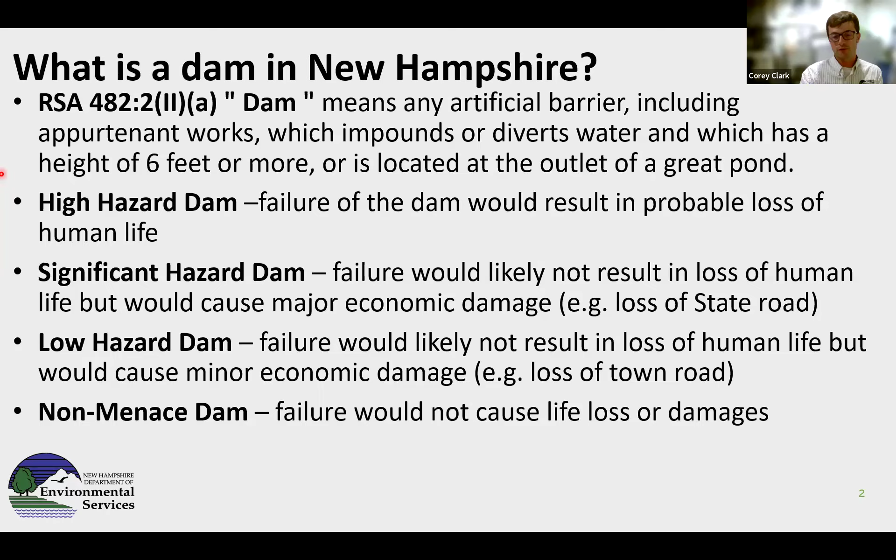And then the bulk of the dams in the state are actually what we call non-menace dams. Those are dams, if they were going to fail, the theory being nobody would really know except for the dam owner. There wouldn't be any loss of life, and certainly there wouldn't be any property damage or other impacts.

So going back to the question that was on the first slide while we were getting the introduction - there are over 5,000 dam records in the state. Those are all the different records from dams that were built previously that are no longer there. There are many sites throughout the state that at one time or another had a dam, typically a wooden timber crib dam in the 1800s. If you go to those sites today, there's nothing remaining of that prior dam being there.

So we have records that actually go back to the 1930s and some records actually prior to that. And so all those records combined lead to the 5,251 dam records.

However, how many are active dams? These are the dams that are over 6 feet in height or located on a great pond or maybe a stormwater detention basin. Roughly 2,596 dams are all located throughout the state, and those are our active sites. So those make up the different hazard classes, which I'll get to in a moment, and also the non-menace dams.

And so those hazardous dams, those are the ones being high, significant, and low. There are 814 hazardous dams. And I'll jump into it a little bit more in a minute, but those are the dams that get inspected on a routine basis. Basically, if those dams fail, there would be impacts, whether it's loss of life or even loss of a town road. So those are dams that we classify as hazardous and are inspected.

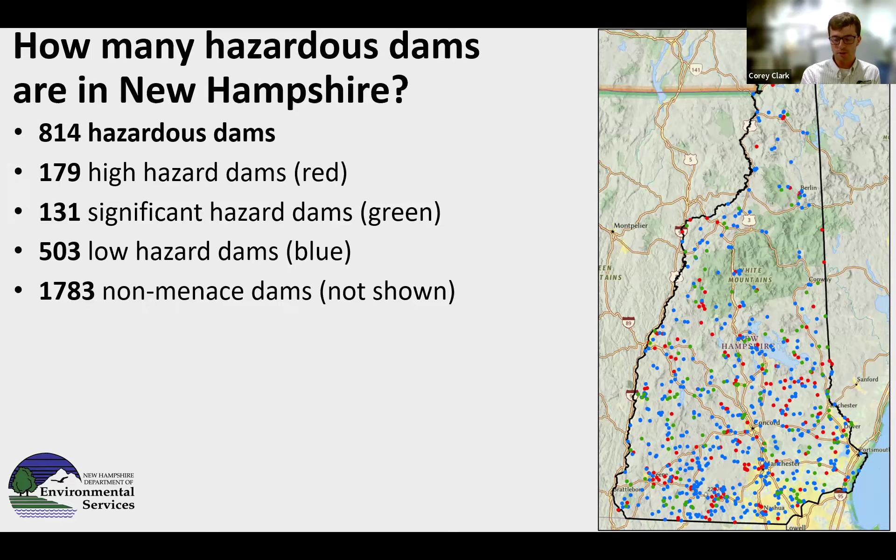Now we dive into what we call the condition of the dams. They're actually broken down, and this is where you can kind of get into, is my dam in good shape or is my dam in bad shape? So out of all the different dams we have in the state, these are the hazardous ones. So those are 814 dams.

251 are satisfactory. They meet all the different loading conditions. They're designed properly and can handle the different storm events that are applied to the dams. Then we have 223 fair dams. Those are dams that might have some concrete deterioration, but really they still meet all the loading conditions. They still can pass the design storm event, but there are some issues that may need to be addressed.

And then we have 205 poor condition dams. Those are dams that don't meet a loading criteria. Think of it as a bridge that may have some sort of deficiency in which it's not meeting the actual design load for the bridge. Similar for a dam. So that's 205 dams that either don't meet stability criteria during a flooding event or can't pass the required discharge during a flooding event.

So going back to high hazard dams, for example, those dams have to pass the 1,000-year storm event with 1 foot of freeboard. Significant hazard dams have to pass the 100-year event, and low hazard dams have to pass the 50-year event. So if those dams cannot pass that volume of water through a spillway or other means, then that's where they get shifted into the poor criteria.

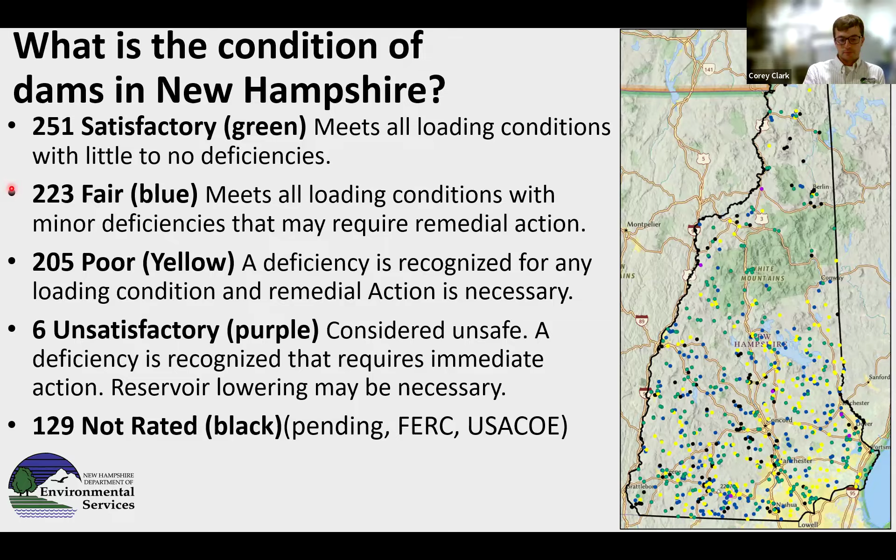So I apologize that things got moved around a little bit in this slide, but the purpose of the dam. We have most of the dams in the state, roughly over 40% are for recreational purposes. Another 27% are for conservation. And then we kind of dive into the other different uses. So we have mill uses, hydro makes up about 2%. And most hydros in the state are regulated by FERC, so actually regulated by the feds.

There are some other hydros that are non-FERC regulated because they're grandfathered in. They were generating power prior to the passage of the FERC criteria in the 1920s. And then we have water supply and a couple other means. But really, most of the dams in the state are actually there for recreational purposes.

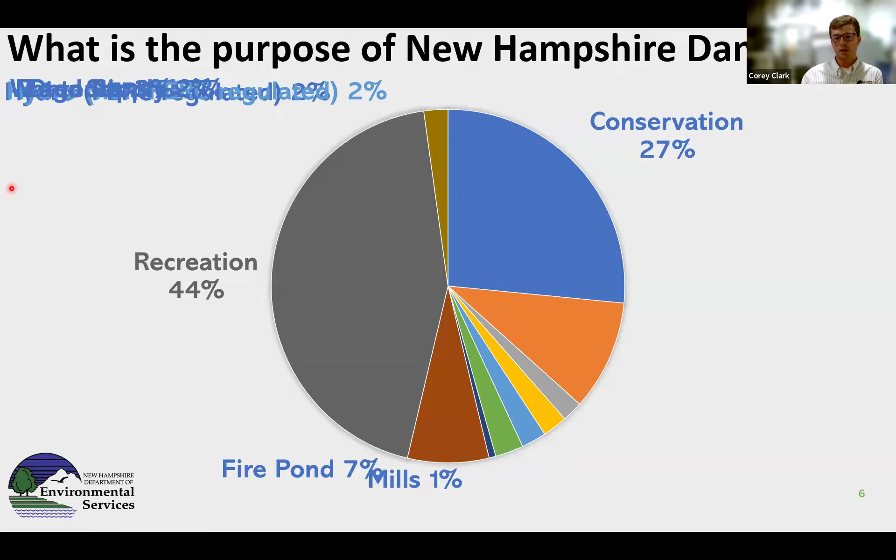So who are actually the owners of the dams in the state? Now, the state of New Hampshire owns a lot of dams. You're going to hear about that in a minute here. But really, the bulk of the dams in the state are privately owned. And that really is because the bulk of the dams that we see are those non-menace dams. And most non-menace dams are owned privately.

So there might be a farm pond dam that was built, say, in the 1960s. It could also be a dam where they built a driveway and they wanted to have some kind of pond alongside their driveway. Still meets the criteria of a dam. Once again, it's a non-hazard, non-menace dam.

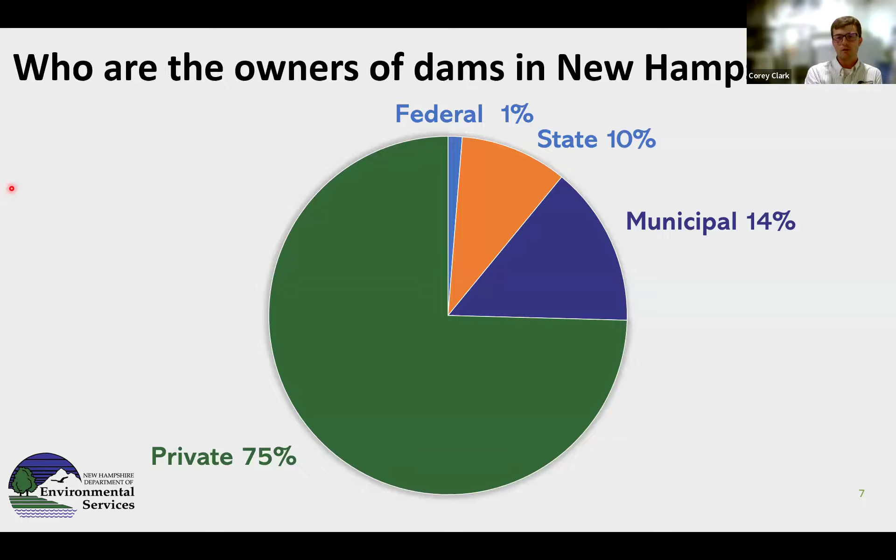But then we break down into municipal owned dams, state owned dams, and then federally owned dams. Those federally owned dams, those are typically the big flood control sites that everybody's familiar with. The Hopkinton Everett Dam over in Henniker and Weare. Then we have the Franklin Falls Dam up on the Pemi. And then we have the Blackwater Dam, the Edward MacDowell Dam, and a few others scattered throughout. But the federally owned dams, those are typically the big Army Corps of Engineers flood control facilities.

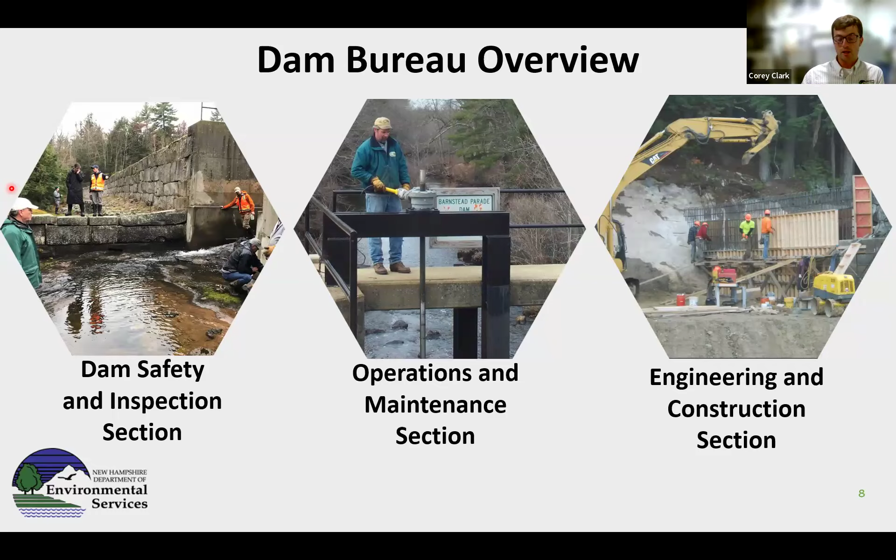So the Dam Bureau is actually broken down into 3 sections that I oversee. I'll go through each section, but all those sections together really create the Dam Bureau. And so as you're out paddling on these bodies of water, enjoying these bodies of water, you may see one or more different individuals from the Dam Bureau, particularly trying to either do operations at a site on a lake, or doing inspections, or even reconstruction.

So the dam safety and inspection section. These are the men and women that are responsible for all those active dams. So roughly the 2,600 dams all throughout the state. Those are the 814 hazardous ones, along with all those other non-menace ones. So they do routine inspections on the hazardous ones. High hazards get inspected every 2 years. Significant hazards get inspected every 4 years. And low hazards get inspected every 6 years.

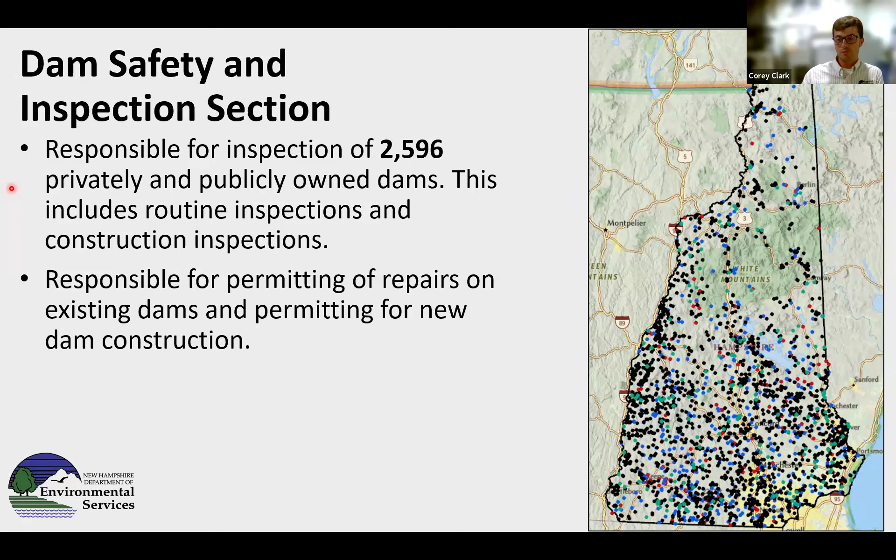All the non-menace dams typically don't have routine inspections. However, they are still in our database, still part of that active structure. So if there's ever a time in which one of those dams get reconstructed, or if an issue comes up at one of those dams, our dam safety personnel can respond accordingly.

So we work with dam owners to ensure their dams are safe, but we also work with the AG's office on enforcement actions. So if there's a dam out there whose owner has gone bankrupt, or there's a delinquent dam owner, we work with the Attorney General's office to make sure those dams aren't creating a hazard or a risk because they're not being maintained properly.

Like I said earlier, we actually work with the Federal Energy Regulatory Commission on overseeing hydropower dams. Hydropower dams are regulated by FERC. However, we have an active role in participating with FERC, because if that federal license to generate hydropower ever goes away, the regulatory oversight for that particular dam now falls on us at the state.

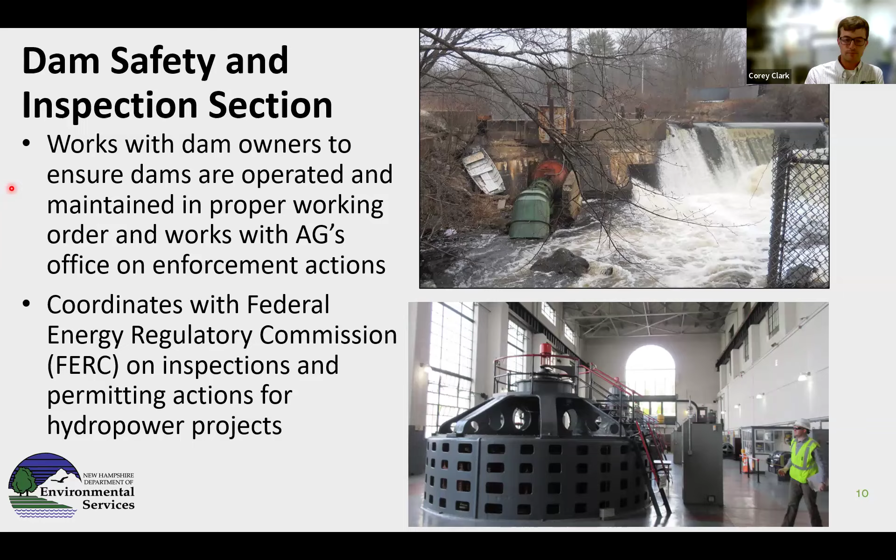Now we move into the operation and maintenance section of the Dam Bureau. These men and women are responsible for operating 202 dams throughout the state, primarily dams owned by NHDES and also New Hampshire Fish and Game. It also includes doing operations at all the big lakes for the most part throughout the state. So we own the dams at the outlet of Lake Winnipesaukee, Winnisquam, Squam, Newfound, Lake Sunapee, Lake Ossipee, and many of the other different lakes all throughout the state.

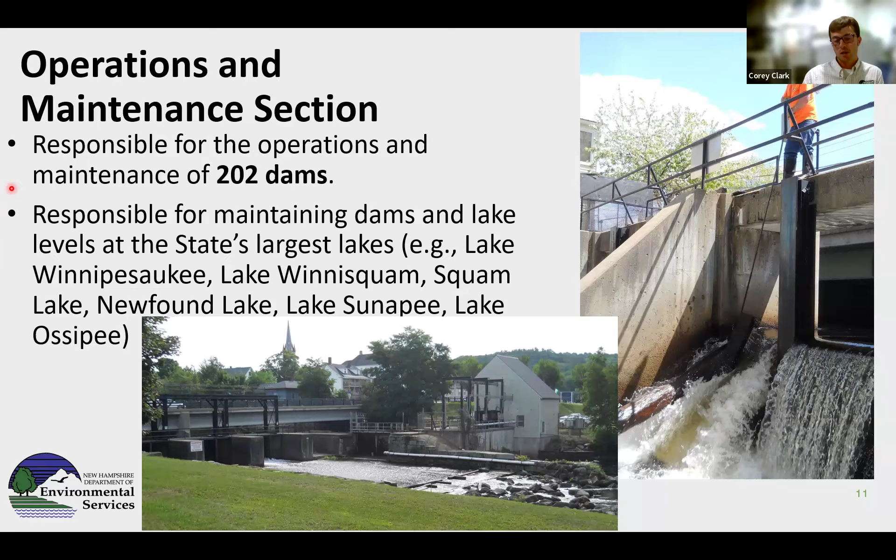With that being said, trying to monitor that inventory of dams and the inventory of lakes and what's going on at those lakes, we actually have a website that anybody can go to and see what's happening on over 30 different water bodies throughout the state.

We also have a cooperative stream gauging agreement with USGS in which we help fund different stream gauges throughout the state. So not only do we have data on a lot of the lakes in the state, particularly the big ones, but we also have data on a fair amount of the different streams and major rivers throughout the state as well. And so anybody can go on and see what's happening there.

As shown in that photo, we also collect precipitation data. We also collect temperature data and some other parameters at some of the sites. That data is then used internally to help with forecasting and figuring out what's going to happen on these different water bodies with different rainfall events or even flooding events coming down the line.

We do have 8 leases with hydropower entities. So we have 8 dams that can generate hydro, and we don't actually operate those ourselves. We actually lease those sites out to private hydropower operators.

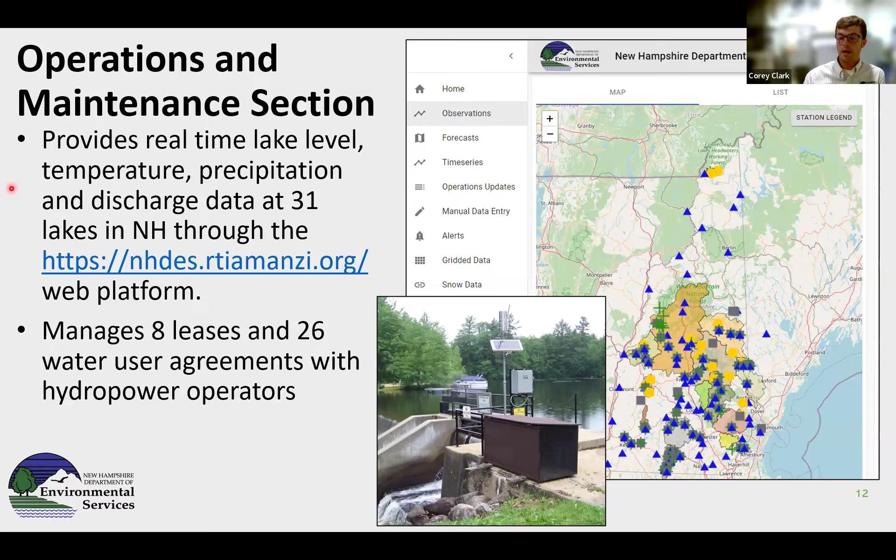We also have water user agreements. You'll hear more about this later in the presentation. But these water user agreements - basically downstream entities, typically hydropower entities, actually pay for the portion of the water being released from different water bodies. So say out of Lake Winnipesaukee, those hydropower entities down on the Winnipesaukee River and down on the Merrimack River pay for the benefit of having that water being released.

Then we move on to the engineering construction section, which is responsible for 270 dams all throughout the state. This also includes dams owned by other agencies: Department of Natural and Cultural Resources, Department of Transportation, UNH, Veterans Home, and a few other agencies as well.

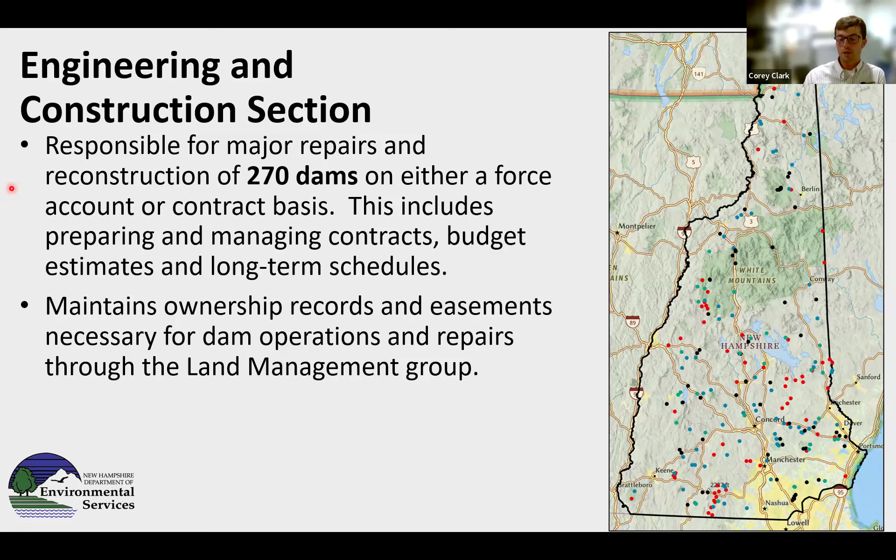That group is responsible for all major repairs, both in-house and out-of-house. We are fortunate that we do have our own in-house construction crew. You can see them in this photo right here. This is the crew working on a high hazard dam owned by Fish and Game, Copps Pond Dam up in Tuftonboro, New Hampshire, that was recently reconstructed.

And with that, we also have to manage all the different emergency action plans that go along with all these significant and high hazard dams. For Copps Pond Dam, you can see this is a typical example of the mapping that goes with an inundation plan that's part of an emergency action plan, in which you can see different portions such as Route 109 and other structures that would be impacted as a result of the failure of that dam.

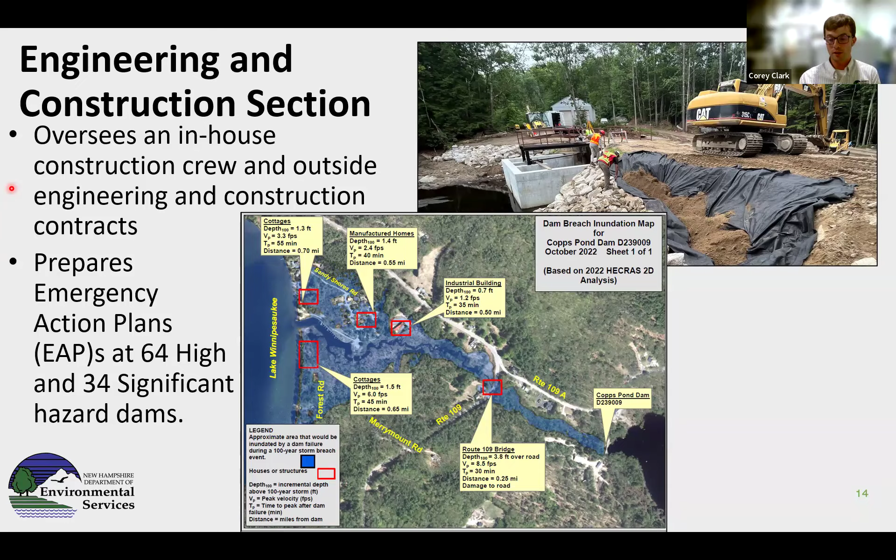So how do we go about funding all this? Well, there are challenges certainly to be said.

The state owns 64 high hazard dams. A recent analysis in 2023 estimated the cost to rehab all 64 high hazard dams would be in the ballpark of about $300 million. The 34 significant hazard dams would be about 54 million. The 80 low hazard dams would be another 54 million. And the 97 non-menace dams would be about 6 million.

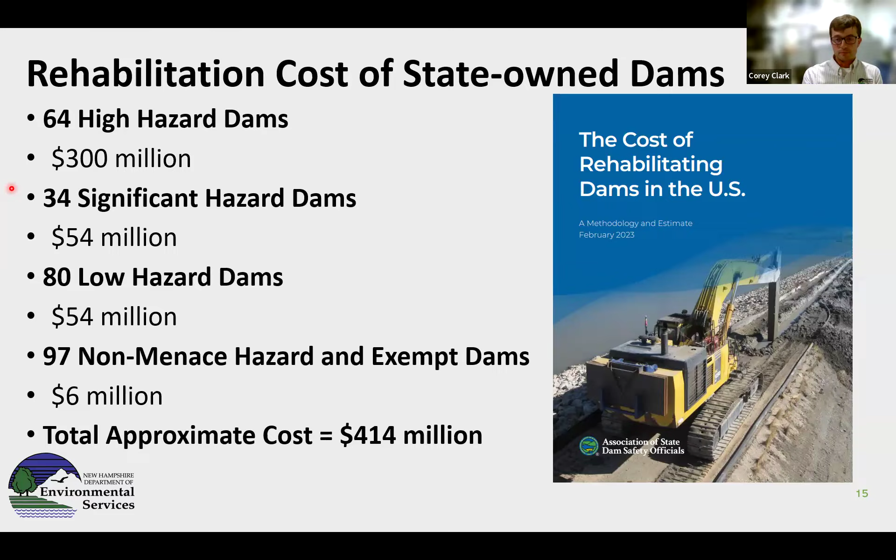So we run currently on a budget of about 7.5 million annually. About 70% of that is state funded through state general funds and capital funds. And then we do what we can to try to allocate additional funding through federal entities, such as through FEMA, through the National Dam Safety Program, that actually helps fund our dam safety inspectors.

And then we're also looking into trying to collect other federal grants through FEMA, such as the High Hazard Potential Dam Grant Program. That's a program in which not only state dams have been rehabilitated, but also privately and municipally owned dams as well. So however, to bring all the dams owned by the state into compliance, we would probably need to double that allocation to roughly about 16 million annually to bring all those different dams up to current standards.

And once again, this is not just a state challenge, but this is also the same challenge that private and municipalities have with trying to fund their dam reconstruction projects.

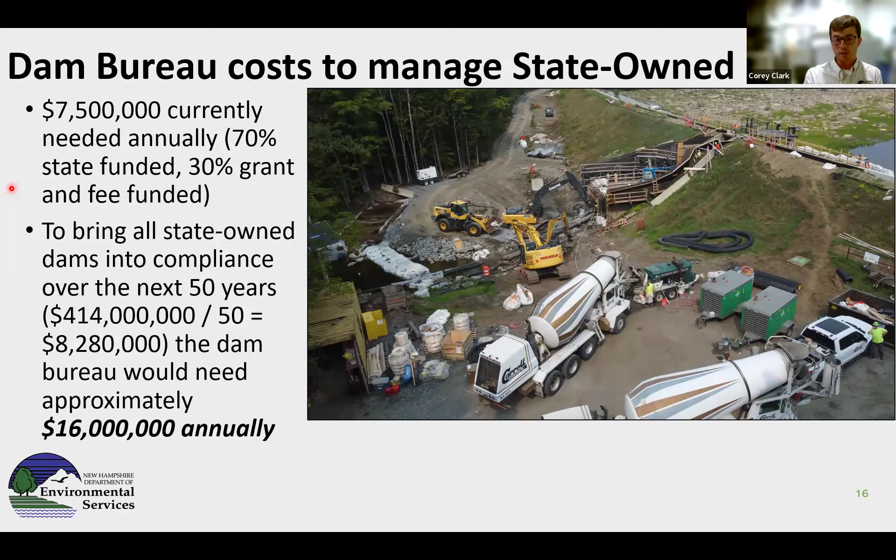So some of the challenges - why are we seeing the cost continuing to go up? The average age of state-owned dams is well over 100 years, and it's really not that much different for dams all throughout the state. A lot of these dams were built for downstream mill purposes by private entities, so they were originally built in either the 1800s or the early 1900s.

These photos here are from Goose Pond Dam - you're going to hear more about that in a minute. But these dams were built for those purposes. However, as the need for water power decreased, the ownership transferred from these private entities to either the state or public entities as well.

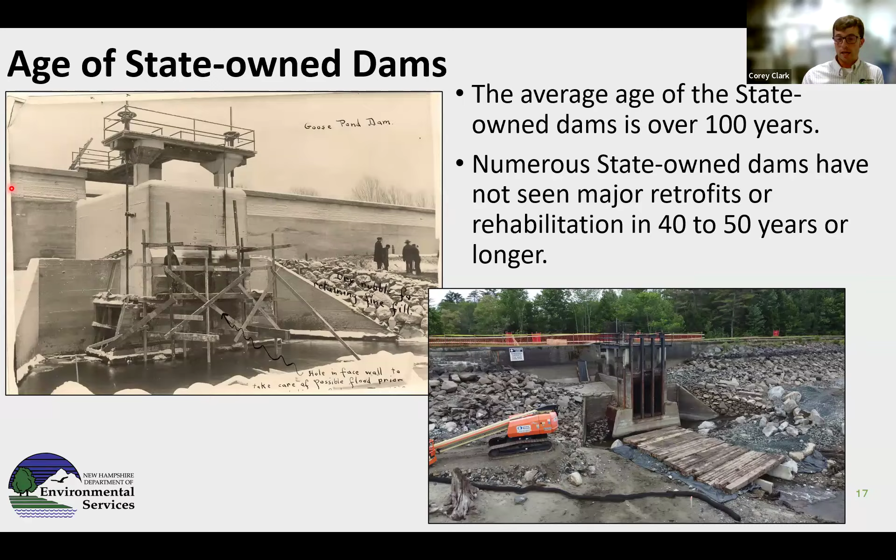The other thing that's happening is there's just a lot more development going on, particularly downstream of dams within different floodplains. This is just one example of the homes located within the FEMA flood map downstream of Ossipee Lake Dam that we own and operate as well.

So one thing I like to point out is the number of high hazard dams, once again not just for state but also private and publicly owned dams, is continuing to go up. And it's not because new high hazard dams are being built, it's just these what were once low hazard dams now have a home or multiple homes built downstream of them. Now that low hazard dam is being reclassified as a high hazard dam because if it failed, it would impact those homes. Therefore, the criteria increases for that particular structure.

So for one example, in 2004 there were roughly 30 state-owned high hazard dams. Now there are 64 high hazard dams.

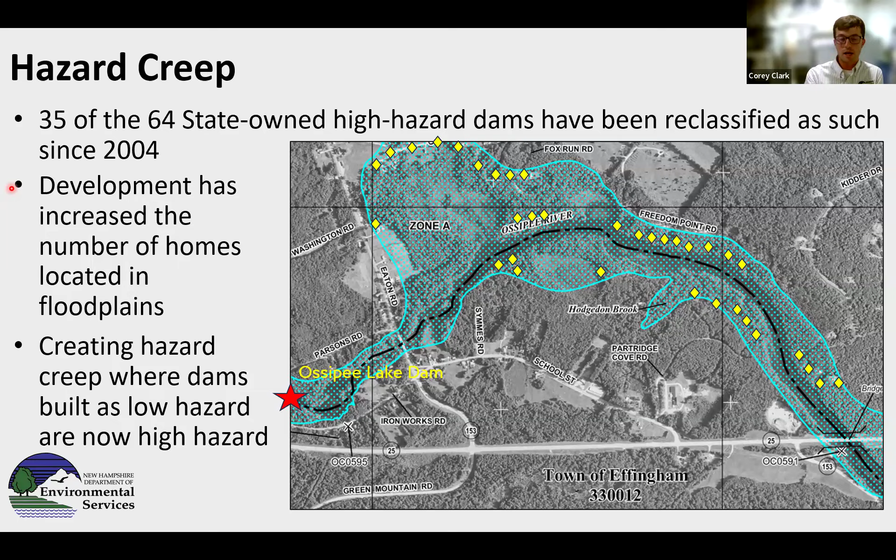The modeling has gotten much, much better. This is computer-aided modeling, not only trying to figure out what's going to happen in a watershed when water is applied to it, but also trying to figure out are these dams stable or not. And so when you're using those new modeling techniques to really break down and analyze structures, we're finding that a lot of the structures aren't meeting the criteria.

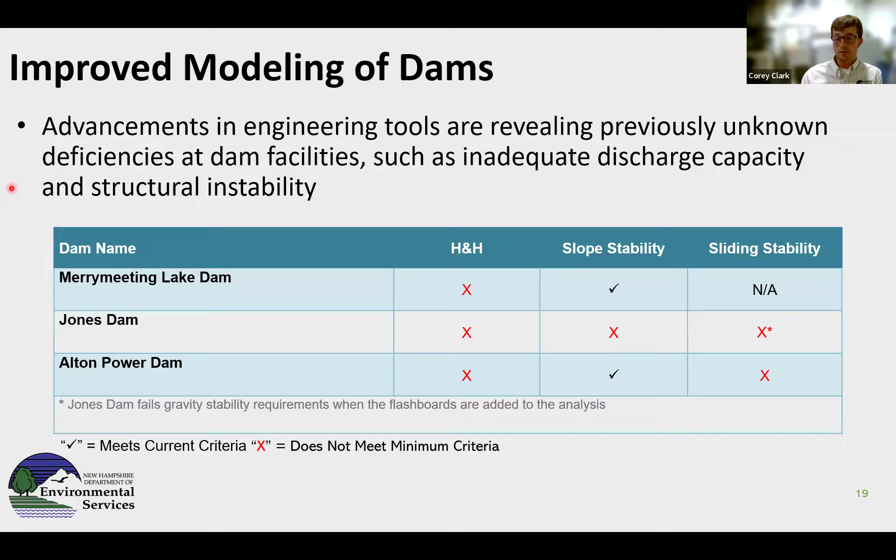One option that we always look into is trying to actually decide, is it in the best interest to keep this dam, or can we remove this dam?

So for example, these are 3 state-owned dams on the Piscataquog River over in Goffstown and Manchester. At one time, they all produced power. Now, the only dam that produces power is Gregg Falls Dam. Hadley Falls Dam hasn't produced since 2007, and Kelley Falls Dam, unfortunately, due to regulatory requirements for hydro, the hydropower leasee actually walked away from that site in 2024. So now we're left just producing power at Gregg.

Knowing that we're going to have to rehab all of these sites eventually, we're actually pursuing removal at Hadley Falls Dam. But it is a challenge - that dam in particular is in the central Main Street area of Goffstown. So there are going to be impacts as a result of that dam removal.

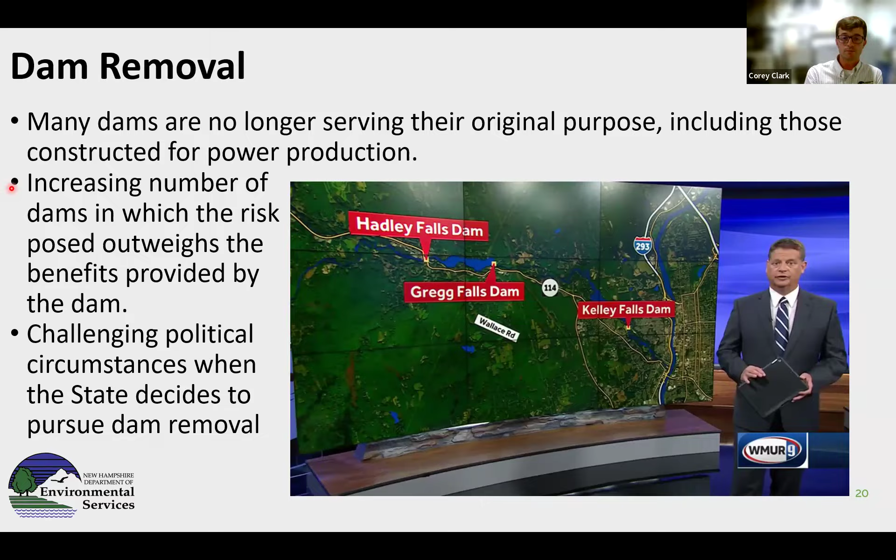So let's jump into Goose Pond Dam to really kind of look at how we make decisions about dams, and how we go about doing these reconstruction projects that some of you may be familiar with, some of you may not.

This is a dam located up in Canaan and Hanover, in the Upper Valley. It's part of the Mascoma River watershed. It's roughly 31 feet tall and a little over 1,200 feet long. The water body and drainage area are relatively small, but the dam itself is actually a pretty good sized dam here in the state of New Hampshire. Once again, a high hazard dam.

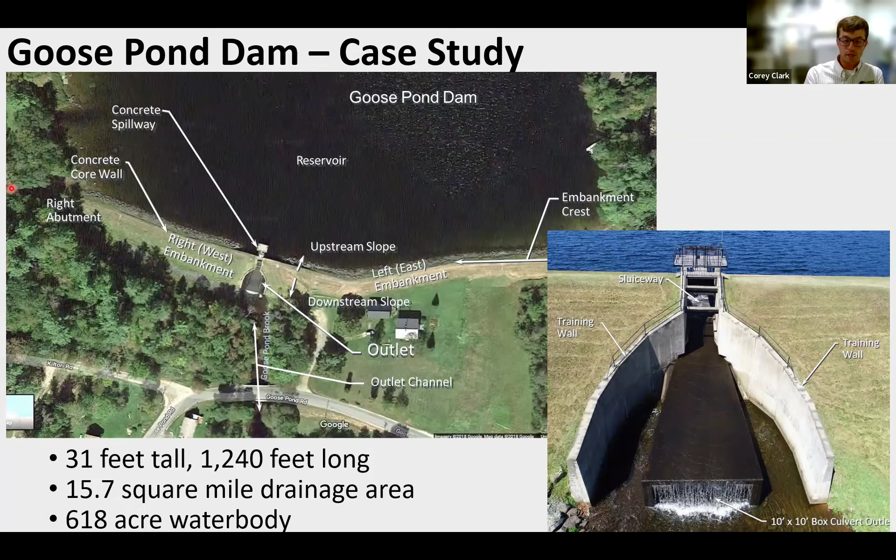It was constructed in 1918 for water storage for downstream mill purposes. It was designed as an earth dam with a concrete core wall, which you can see here on the right of the screen. Interesting thing, there was a former wooden dam here from the late 1800s as well. This dam was much, much bigger, replacing that original dam that was built in the late 1700s or 1800s.

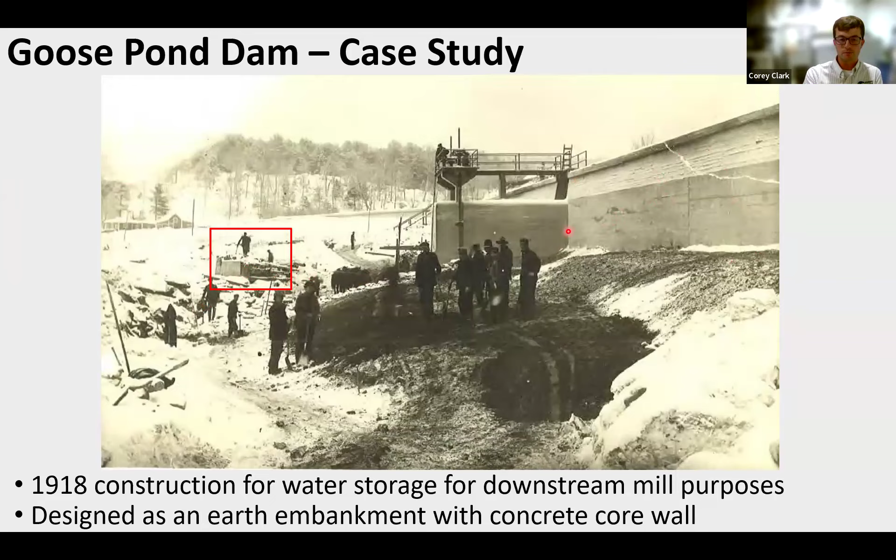One of the things we try to hone in on is figuring out the history of these dams. Fortunately, our records go back to the early 1900s and sometimes into the 1800s. Understanding what's happened at a dam in the past, not only with the construction but what issues have occurred, helps drive rehabilitation decisions moving forward.

One thing I want you to keep in mind is this red barn you see on the right of this photo. This was taken in 1928 when they discovered some seepage, basically water moving through the dam. So they put in a foundation drain along the bottom of the dam to help collect that water moving through it.

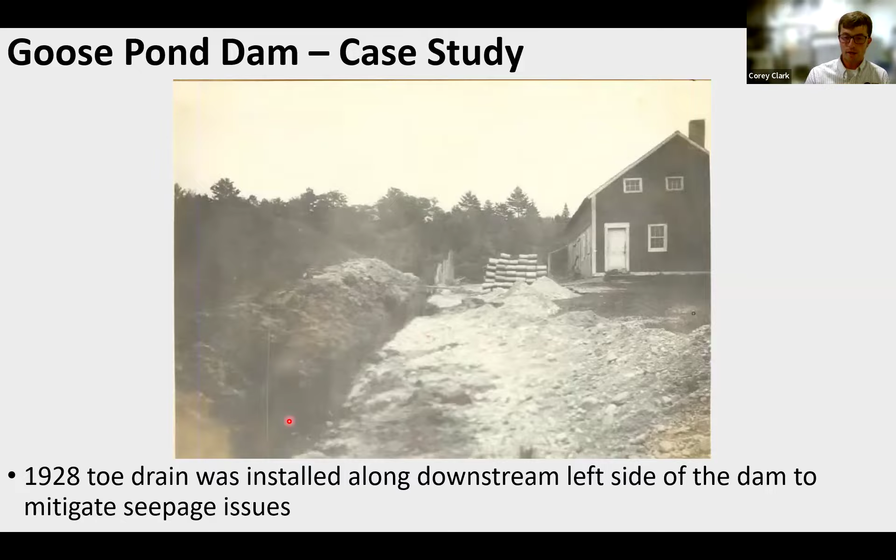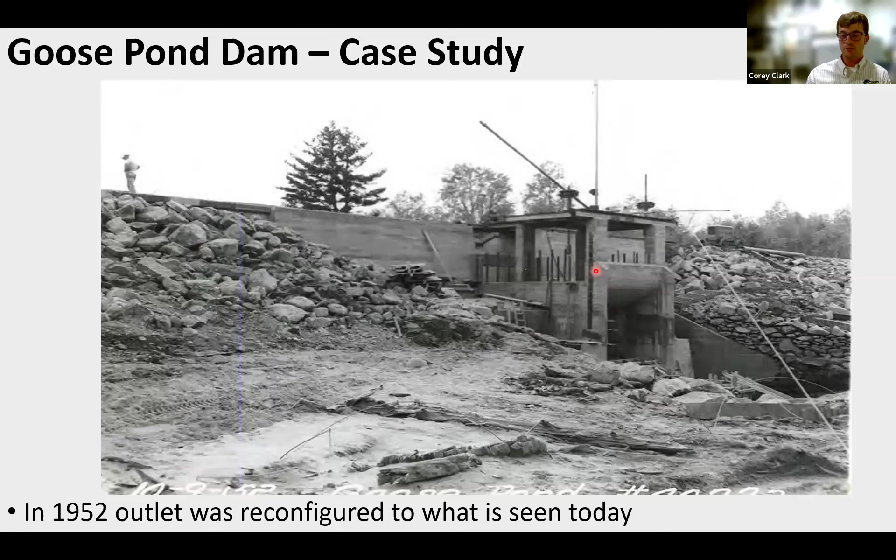In 1952, they did a lot of different modifications to the outlet structure to try to move more flood water through the structure. But really what happened in the 1950s is what we've been rehabilitating over the past several years. Since then, the outlet structure really hasn't changed that much.

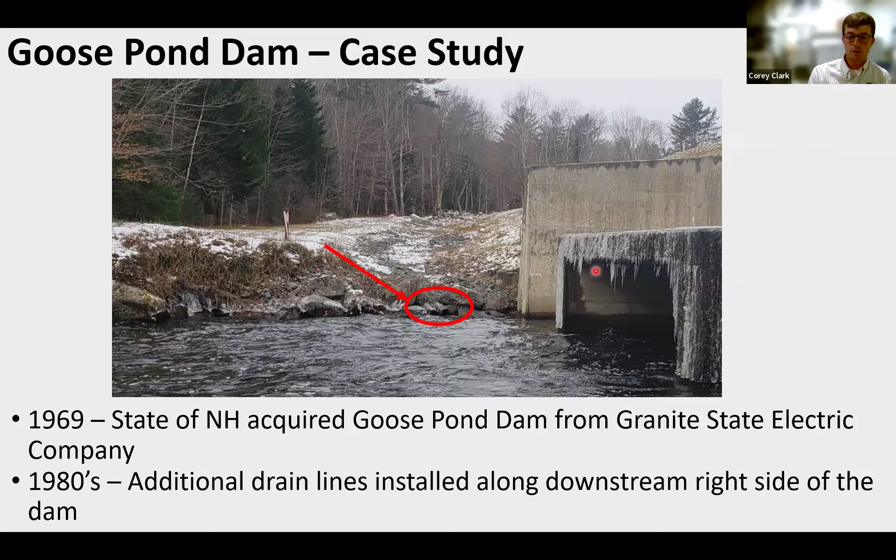The state took over ownership of the dam in the late 1960s. Even though we have 207 dams we're responsible for now, in the early 1900s the state of New Hampshire didn't own any dams. This goes back to power companies no longer needing these structures—Goose Pond Dam was transferred from the Granite State Electric Company to the state in the late 1960s. In the 1980s, more drain lines were installed to relieve seepage.

In the 1990s, our in-house construction crew did some work on the outlet structure, the same structure present since the 1950s. The big thing they did was draw down the impoundment to replace the flood control gates on the upstream side. These are all wooden boards stacked on top of one another. Interestingly, in the rehabilitation these gates are no longer used at this site—you'll see later they actually got moved somewhere else.

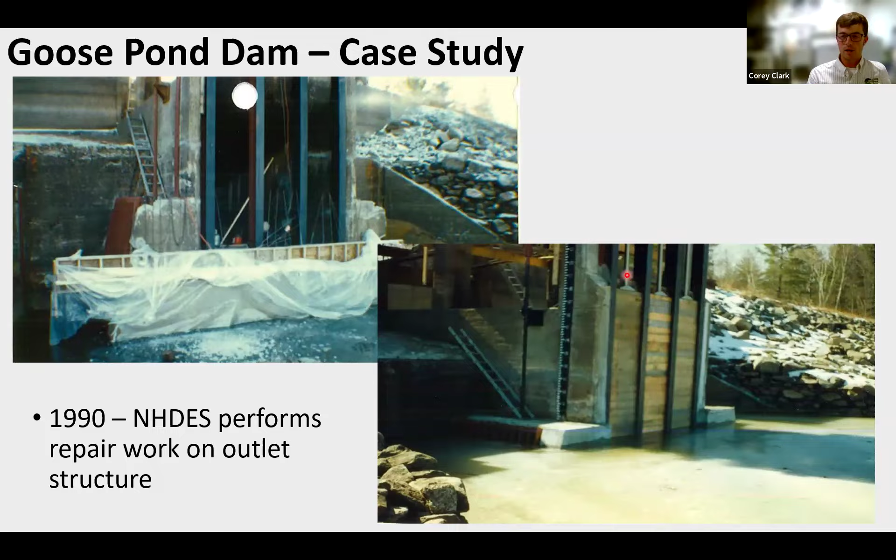In 2012, we were doing repairs to the outlet tunnel—those discharge gates release water into a tunnel. While that work was taking place, we discovered some pretty significant leakage around that concrete structure. We already knew the dam had historically had seepage issues through the earth embankment, but now we were seeing additional issues around the concrete structure.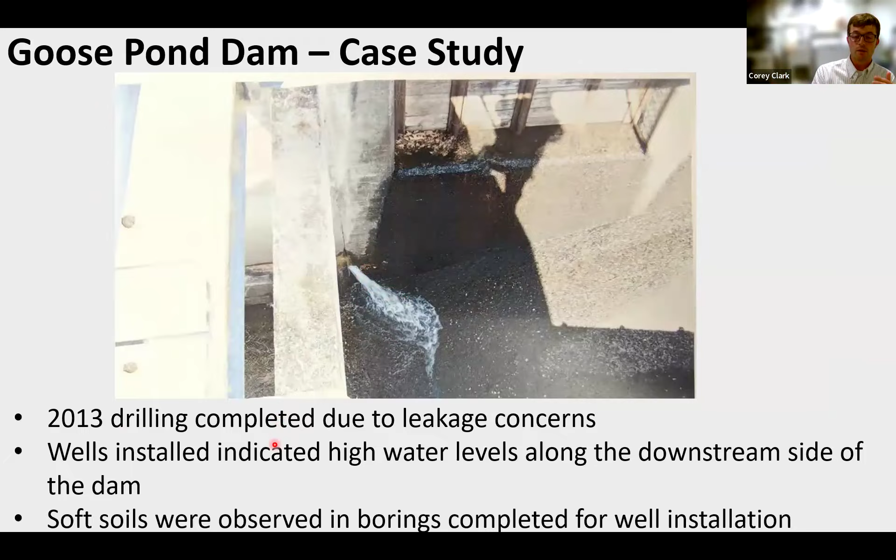So we did some additional borings within the actual embankment and discovered that water levels within it were very high, and that the soils were relatively soft as well. That raised some concern.

So in 2018, we did what's called a potential failure modes analysis. This is where everybody familiar with the dam, along with a consultant, sits in a room over the course of a couple days to dive into what the issues could be with this structure and what we should be most concerned about. What we found was that seepage along the abutments of the outlet works could lead to a failure of the dam, or seepage beneath that concrete core wall could also lead to failure. Those were the two biggest items we really had to focus on.

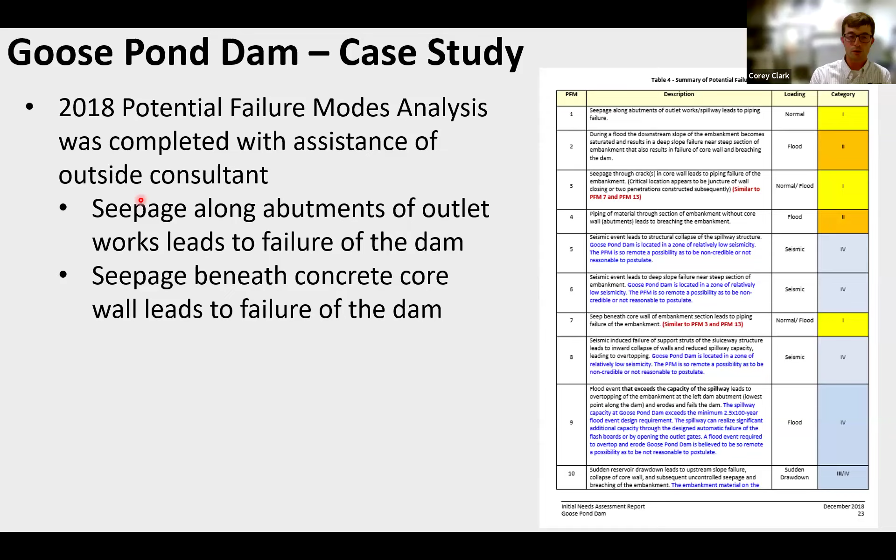So what did we do? We did some more investigation. In 2018, we did a whole other series of borings, really trying to make sure we understood what was in the dam and what we were seeing in those 2013 test boring results. They were actually drilling into the soils to figure out what's there. We also did inspections of those drains from the 1920s and the 1980s and found that a lot of those drains are actually compromised and no longer working efficiently.

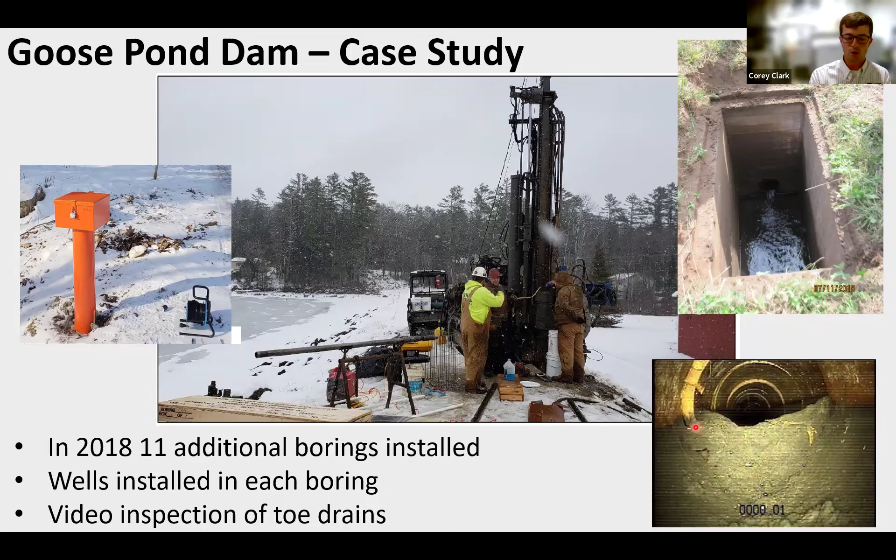So what did we actually see? My apologies here, but I'm going to try to get this video working. One thing that we found... it's actually having some issues playing the media, so I apologize for that.

But what we found was artesian water pressures. In this video, there's actually water dripping out of this case, coming down. So what that means is water is percolating up through the pipe on the inside of this orange box and actually bubbling out through the bottom of the box. We actually had to drill a couple holes to allow the water to escape. The pressures below the dam were such that we were concerned that essentially erosion internally in the dam could actually lead to a failure of the dam.

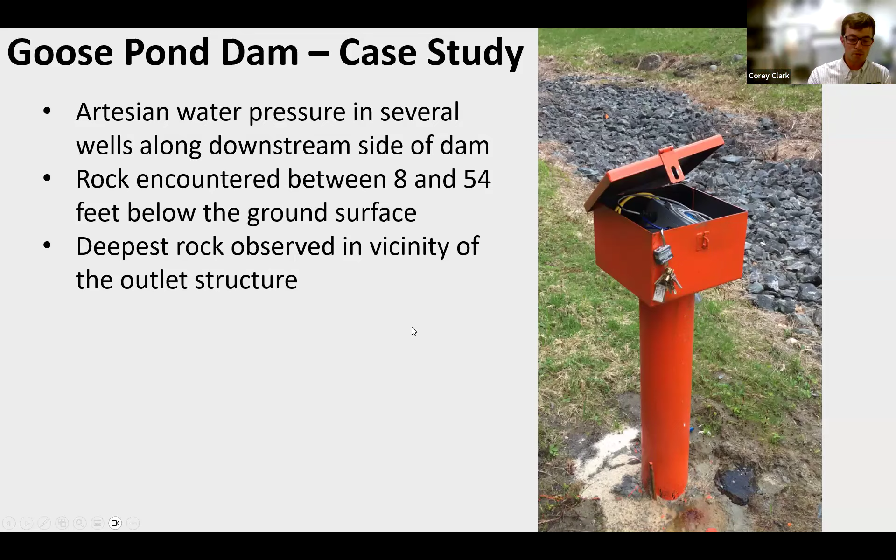So how do we go about addressing that? We started doing a full reconstruction design in 2020, which included rehabbing all of that concrete work and also addressing the downstream side of the dam. Let me just jump back to my pointer here. So we started basically the downstream side, that was to address water moving through the dam, and the upstream side was to address concrete deterioration, along with addressing those wooden gates.

Those wooden gates that were installed in the 90s had actually been underwater for nearly 40 years, and so we were concerned about failure of those gates after that time as well. Just for context, this is the normal pond surface right here at the blue line that Goose Pond is typically at. To do this level of work, we had to draw down the pond roughly about 20 feet.

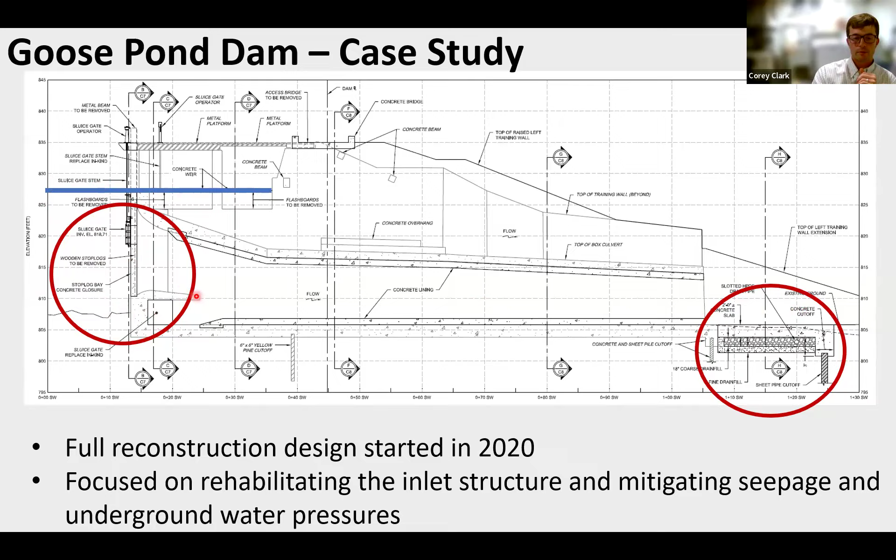Here's a little bit more of that seepage collection gallery that we installed, along with 20 different relief wells. These wells were installed along the toe of the dam to collect that water moving through and bring it down into the outlet channel so that we were reducing those pressures that we were seeing in those wells.

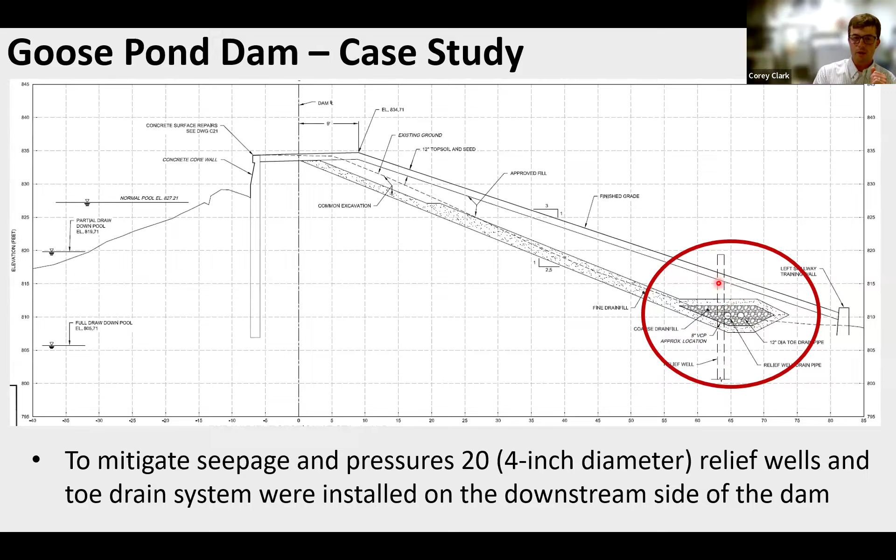Like I said before, in order to actually do this work, we had to drain Goose Pond down. This is Goose Pond drained down about 20 feet. Once again, a lot of these ponds are great ponds in their natural state. So it was a natural pond at one time.

However, with the dam being there, it would artificially raise that impoundment. The reason it was artificially raised is they wanted to be able to use that storage for downstream mill purposes. That's why a lot of the lakes and ponds that we enjoy all throughout the state are what we call raised by damming. There is a dam at the outlet of the pond because at one time someone was trying to use that additional water that was stored behind that dam for downstream purposes.

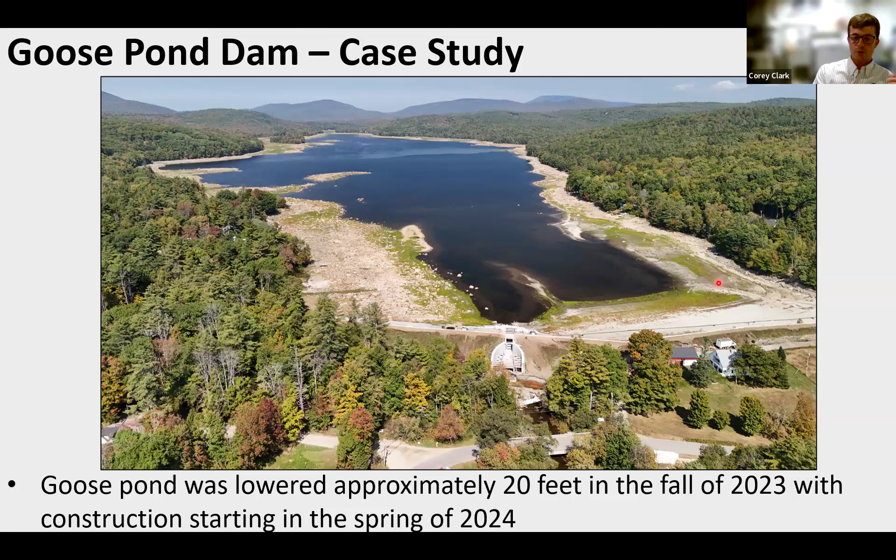So the drawdown started in 2023 and construction started in 2024. The first thing we had to do is install a cofferdam. Everybody thinks you install a cofferdam, the pond can stay intact. That is typically not the case, but the contractor still has to be able to manage storm events.

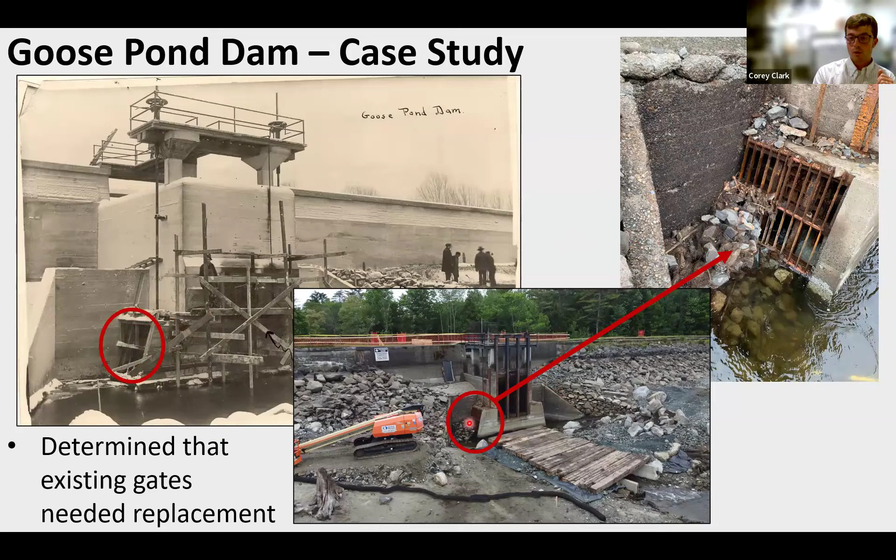One of the things we discovered early on—bear in mind this dam hasn't been drained down since 1990—was that the outlet gates, which we originally thought could be rehabilitated in place, were actually beyond their useful life and needed to be replaced. That required working with the contractor on a change order to replace those gates. You can see the same configuration here as in 1918. Those gates were actually over 100 years old when we finally removed them in 2024.

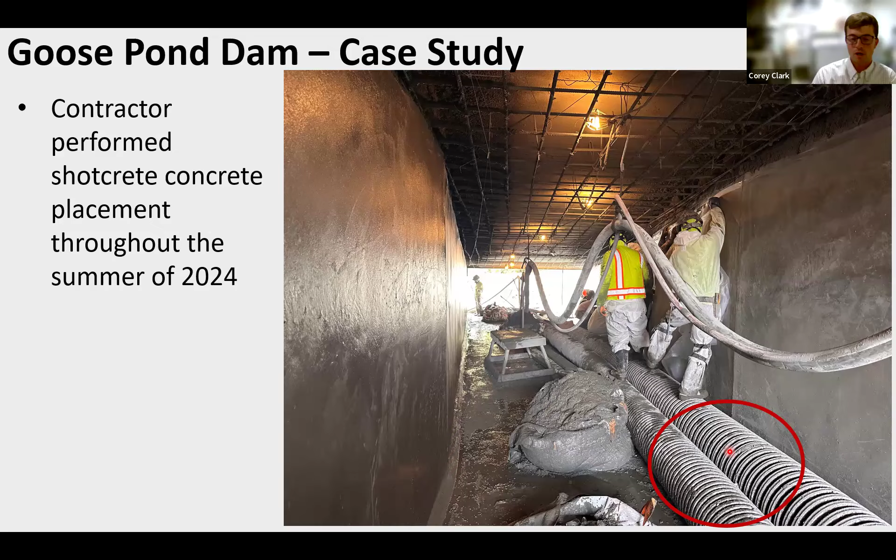These are the bypass pipes—two 12-inch pipes running through the tunnel that the workers had to work around. This is the tunnel being relined with shotcrete in 2024 as part of rehabilitating the concrete throughout the structure, including refacing the concrete walls. This is where the gate was that has now been removed, with new gates going to be installed.

Those big wooden gates concerned us because a failure of one of them, while not necessarily a dam failure, would discharge a volume of water that could cause downstream harm and lead to loss of the impoundment. Since we don't need them for flood control purposes, we elected to remove those gates and instead install a much smaller operational gate for routine operations.

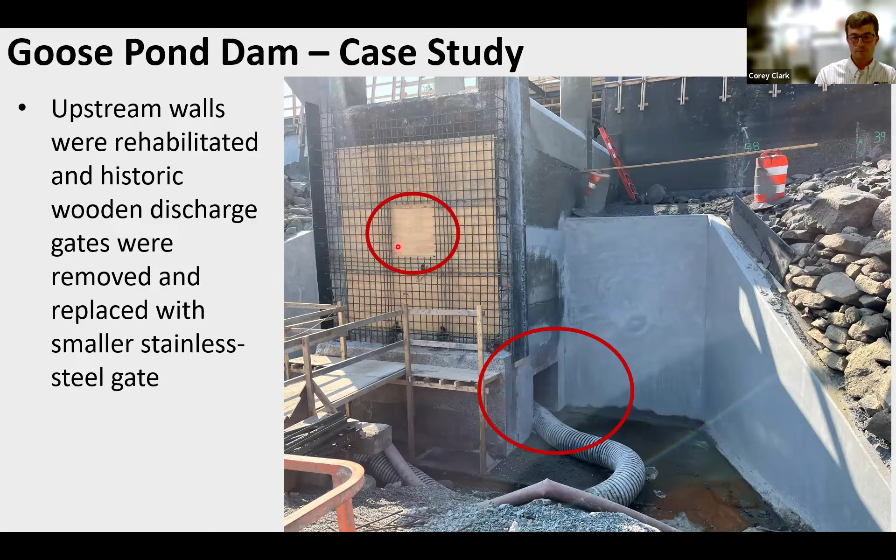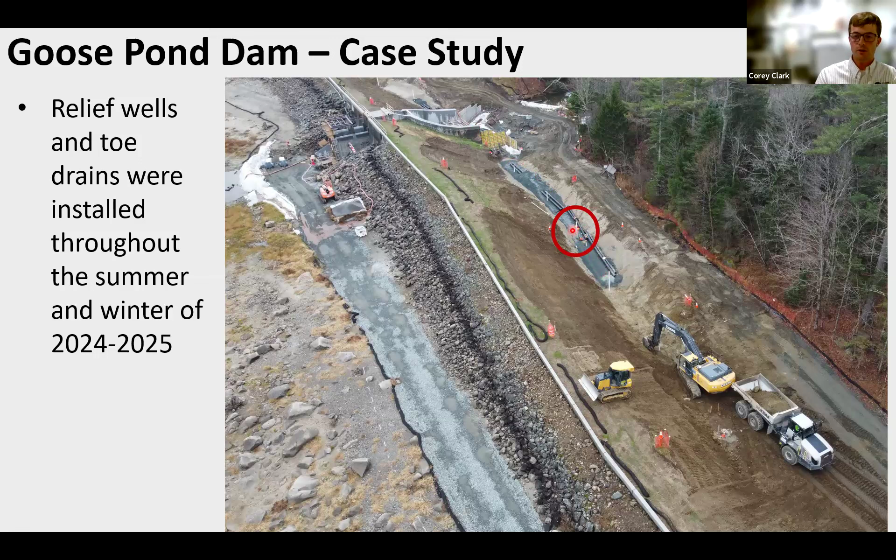You can see here the drain lines going in—this happened basically in 2024 into 2025. Each of these white pipes are relief wells installed along this drain line. The prior drain lines were all excavated and removed, and new lines were installed much deeper, with one line collecting water from all the wells and the other collecting water moving through the earth.

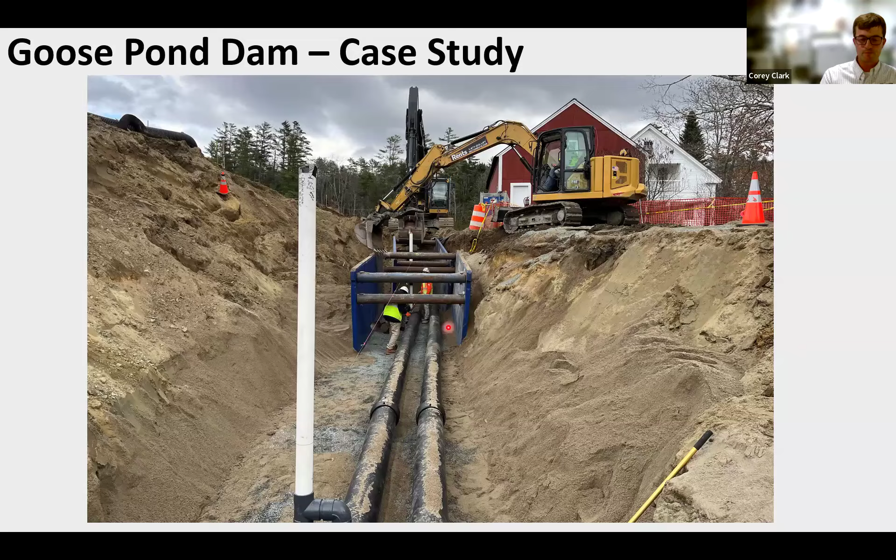As we were wrapping things up in 2025, the contractor had installed the new gates, and because of that we could no longer bypass water through the structure. So they had two 12-inch pumps on site to pump water around the dam. A lot of people think two 12-inch pumps should move a lot of water, but unfortunately you really cannot—pumps are kind of a last resort for bypassing water. Unfortunately, we overtopped the cofferdam during storm events in the spring of 2025 simply because the pumps couldn't keep up.

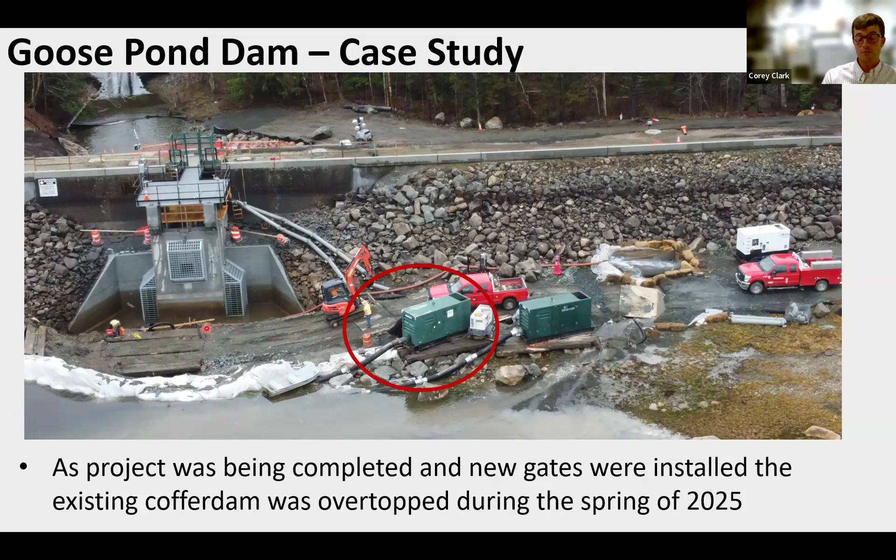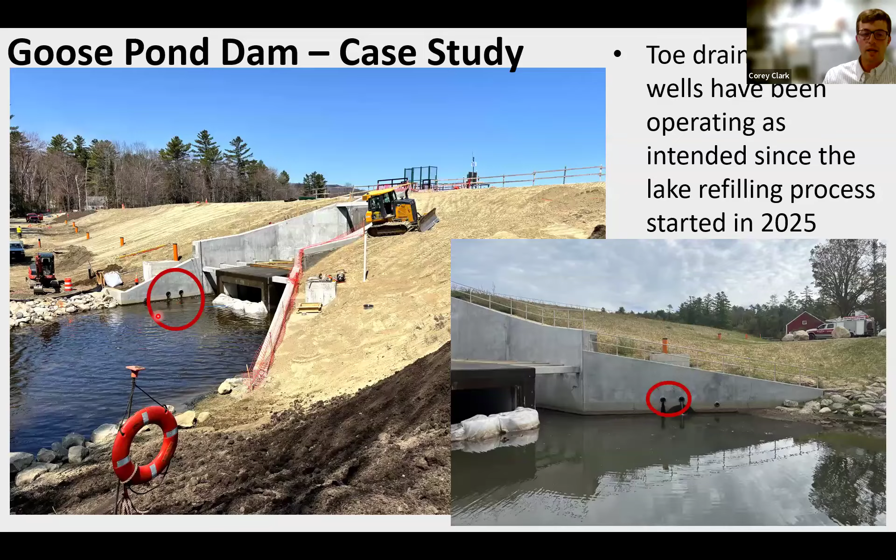These photos are from 2025, as we were regrading and wrapping things up. You can see all the different wells now have a casing on them. One thing to note is that those drain lines, even during the refill process, were already working—you can see water coming out of this line right here, so those drain lines exiting the walls were already working as we were refilling the lake.

Unfortunately, during the summer of last year we found that the new gates had some issues. Last fall we drew the pond back down after partially refilling it and did what we could to address the gates, thinking we'd fixed everything. However, during final gate testing we had to let the pond naturally refill back up to test the gates under full pressure, and we found manufacturer defects within these two low-level gates. Right now we're working with the contractor and the gate manufacturer to come up with a repair procedure for those gates.

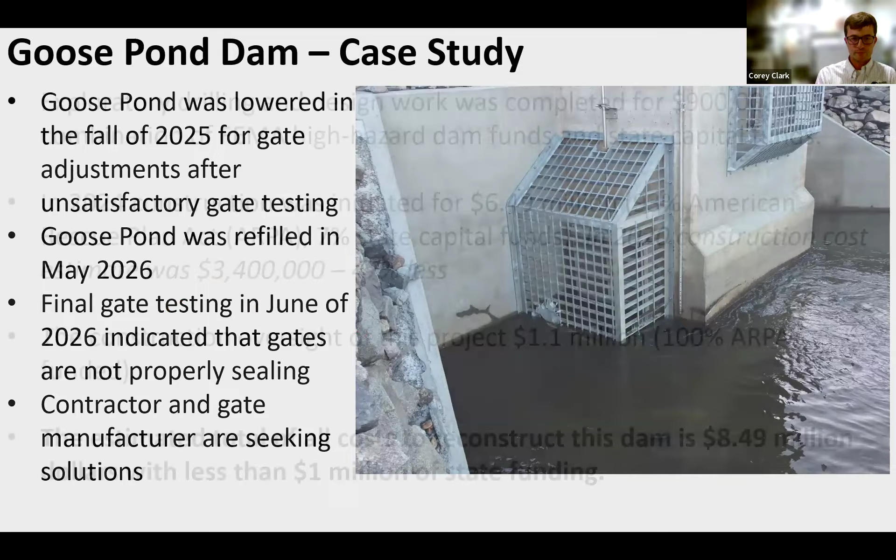So how much did this all cost? About $1 million for all the design and drilling work, about $6.5 million for the construction—mostly funded, fortunately for us, through the American Rescue Plan Act, those COVID relief funds that came in through the state, which we were able to use for reconstruction. In 2020 the project was estimated at $3.4 million, about 50% less than what the bids ultimately came in at. Construction oversight for this project is about $1 million, bringing the total to about $8.5 million, with the state funding about $1 million of that for reconstruction of Goose Pond.

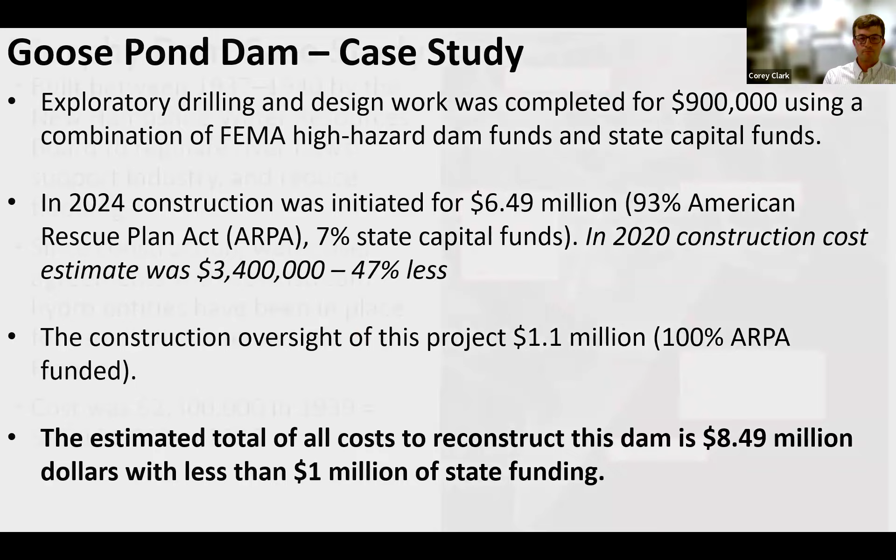Now I'm going to jump up north to Murphy Dam. This is the dam you saw originally in the original slide, built actually by the state of New Hampshire.

This is the largest dam that we have, and certainly the largest dam ever built by the state. It was built between 1937 and 1940, really for flood control purposes on the Connecticut River and to support downstream industry, hydropower, water needs, things of that nature.

It's a very big site. This is the main dam right here. We have the Broom Gate, that's the tower you saw in the original figure that discharges water to a control building. And then we have a big spillway over here, basically for storm events. Interesting thing to note, in 1939 it cost about $2.3 million to build this structure. In today's dollars, that would be about $55 million.

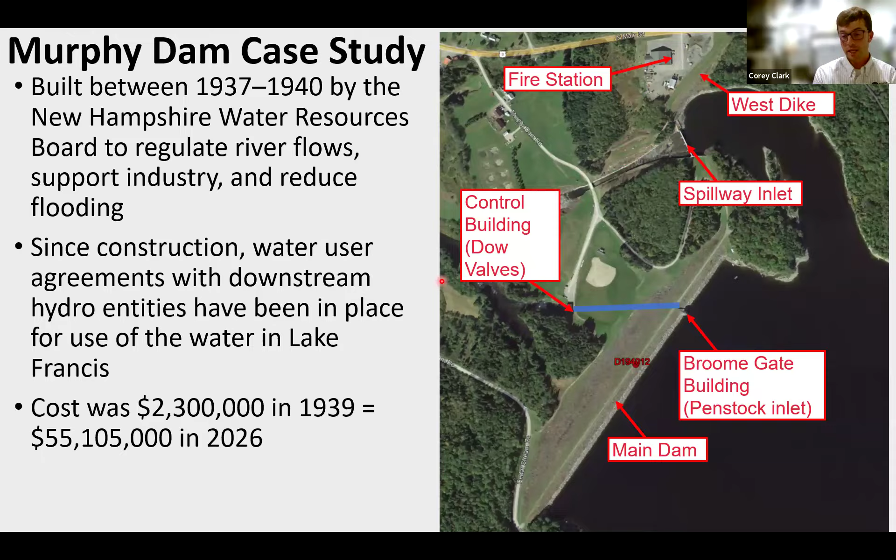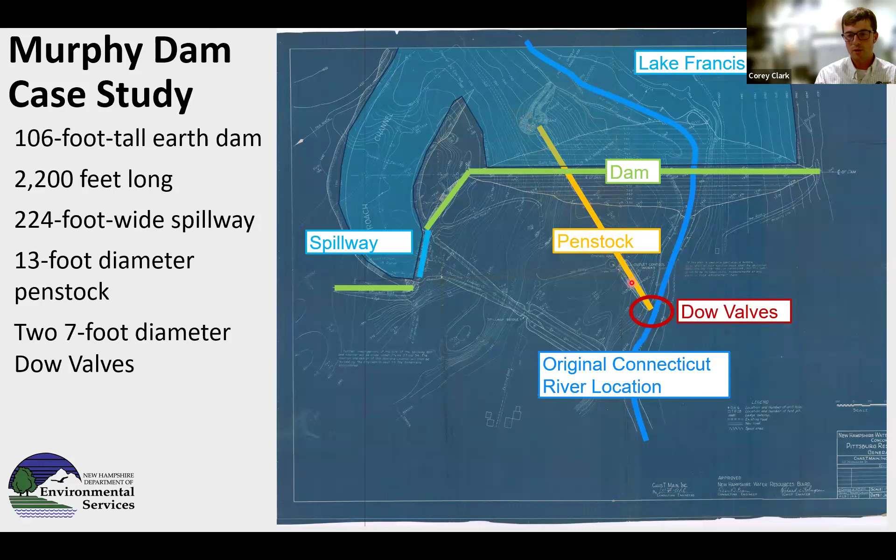This kind of breaks down the original location of the Connecticut River, and now we have Lake Francis. Once again, here's the dam, here's that penstock, Dow valves. The dam is just over 100 feet tall, 2,200 feet long. The spillway is about 200 feet wide. And at the end of this 13-foot diameter penstock are two 7-foot diameter Dow valves.

So all the water in the upper Connecticut basin goes through Second Connecticut Lake, First Connecticut Lake, then down into Lake Francis and Murphy Dam. So all the Connecticut River through Pittsburgh and Clarksville moves through Murphy Dam. And that dam actually gets drawn down a lot for power purposes and flood control purposes.

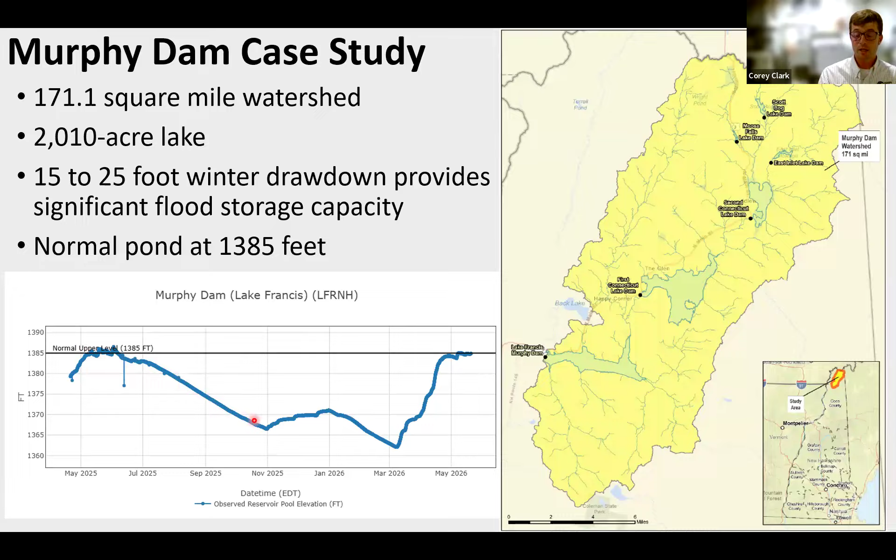So here's the normal curve. You can see during the winter months it actually drops anywhere from 15 to 25 feet to provide that flood storage and to continue to use that water for downstream purposes.

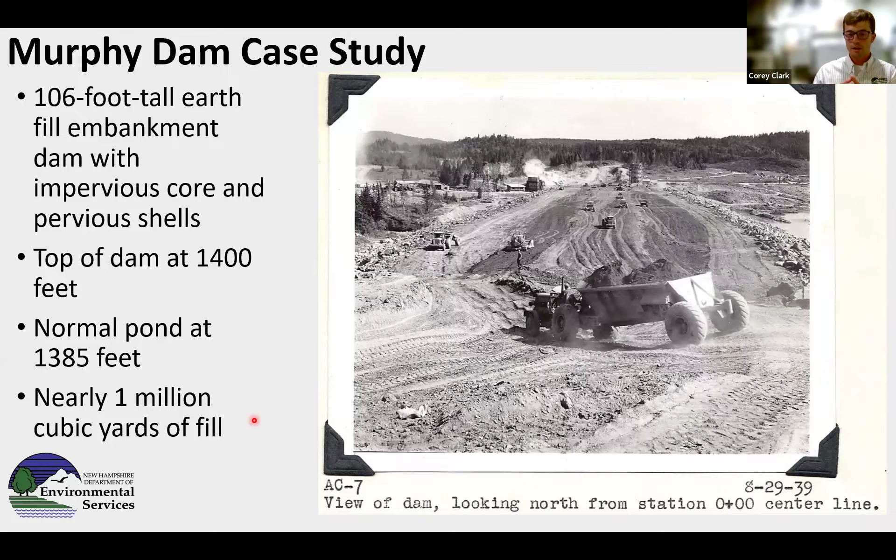Nearly 1 million cubic yards of fill was used to actually build this earth embankment, that fill being taken from all around the Pittsburgh and Clarksville area. It's kind of your typical earth embankment dam, with an impervious core, basically the center of that dam being tight material that water can't get through, and drainage material on the outside of that core so that if water does get in there, the material doesn't erode from inside out.

Here's those three gates that were actually from Goose Pond. So here's up at the spillway. We have all these stop logs and these drop stanchions, and you'll hear a little bit more. In order to actually discharge water and be able to control that discharge to the spillway, particularly when the penstock is inoperable, we elected, because we were rehabbing Goose Pond, to take those three big gates and bring them up here to Lake Francis and install them in the spillway.

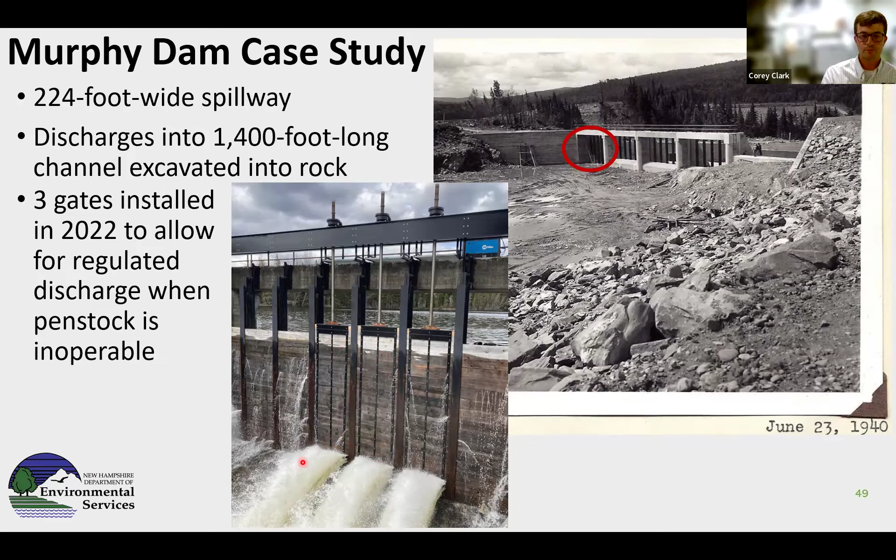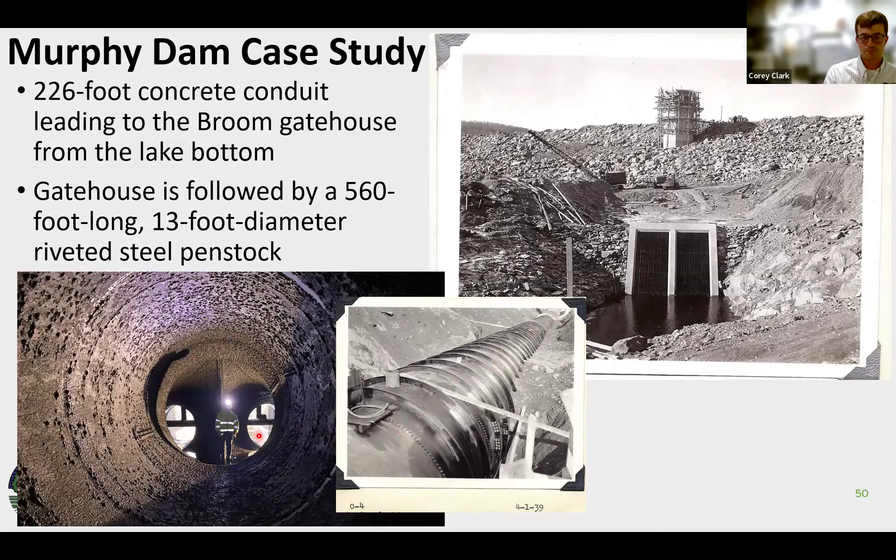Here's some photos of actually that penstock that moves through the dam, 13 feet in diameter, and it breaks down into these two valves you can see here. These are those two 7-foot diameter valves. This is the inlet, which is under about 90 feet of water in Lake Francis, and then moves through this pipe. This is it exposed, and then it discharges into these two Dow valves. These are those valves from the downstream side. Here's a photo of those valves actually being installed.

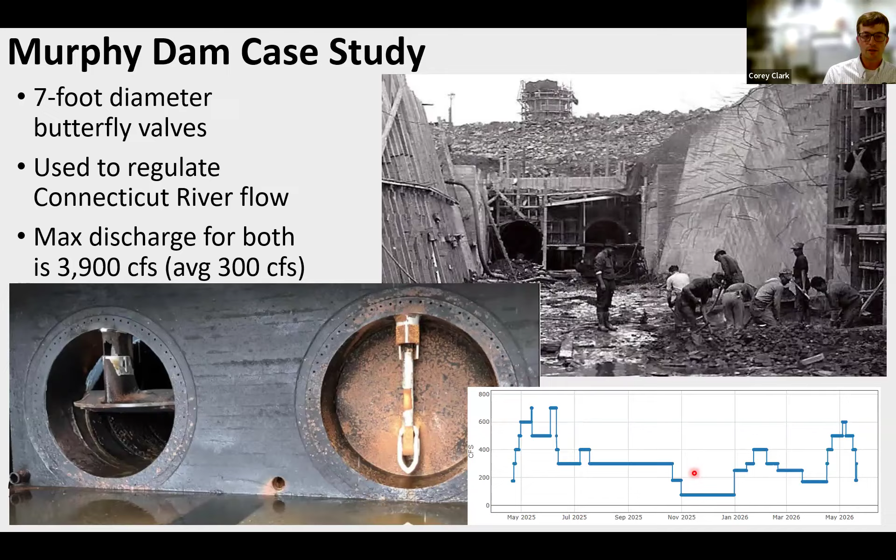So, having it be a 90-year-old structure, we weren't quite sure what the issues up here were. So this is where we dove into a potential failure modes analysis. Once again, just like at Goose Pond, in 2018 we looked at what are the real concerns here. And really, those concerns focus on the spillway. You have 100-year-old concrete up there, and the fact that that spillway is prone to big ice loading during the winter season, along with flood loading, if there's ever a flood event up there.

So certainly concrete deterioration is a concern. And those big steel stanchions are also a concern if any of them actually let go, particularly when the pond is completely full, because there's about 15 feet of water behind all those steel stanchions. The PFMA also highlighted the need and importance of maintaining the dual valves for control of the reservoir. If we lose those valves, we lose control of the Connecticut River downstream.

So we actually elected to look more into the valves. While we still need to be focused on the spillway eventually, we felt that the valves really need to be looked at because of their age and because of ongoing maintenance issues at those valves.

In 2022, we had a consultant look at the valves who came up with a recommendation that said within the next 2 to 4 years, you really got to replace those valves. They're at end of life, and they're certainly going to start causing issues.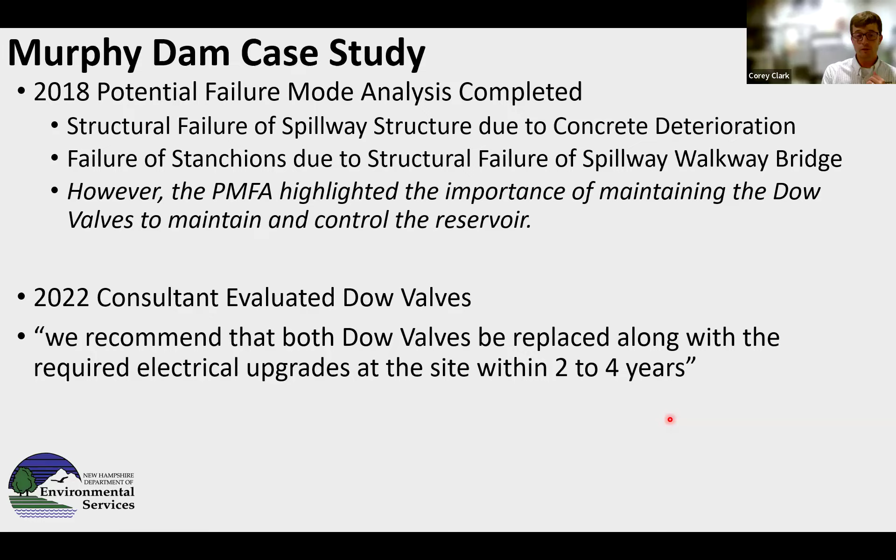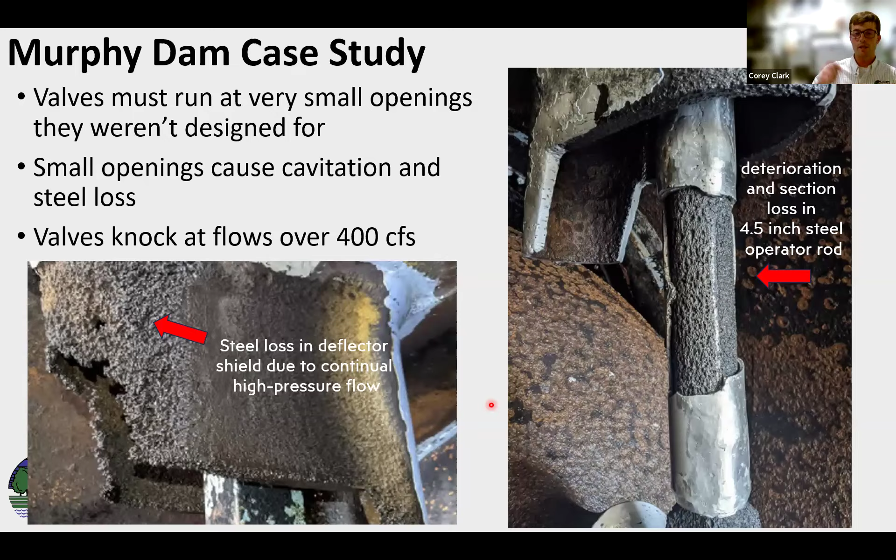Some of those issues we've also seen over the past decade or two. So what are the issues we're seeing at those Dow valves? Because the flows and pressures are so high, these valves are holding back 90 feet of water, and over time the steel has been eroded out from the flow of the water. So the valves knock, they're basically loose inside their housings. There are issues when we try to go to higher flows over 400 cubic feet per second, where things really start banging around pretty good. That's because of steel loss, not only on the plates of the valves themselves, but also in the operators that raise and lower those valves and manipulate the openings.

So we dove into an alternatives analysis. What are our alternatives for replacing these valves? Do nothing and continue what we've been doing, or all the way up to actually trying to replace both valves. We chose to go with option 4, which was replacing both of those valves, with the idea being we can always step back if we need to and just replace one, but let's see if we can't actually try to replace 2.

So we had a consultant develop design plans for that. The thing with the Dow valves up there in the Connecticut River is downstream of Murphy Dam is one of the best fisheries in the state for cold water fish. The reason is that water is 90 feet down as it's being discharged, so it's very, very cold, typically well below 50 degrees. The benefit of that is that cold water coming out provides that cold water fishery.

So we collected a lot of data to figure out when we can shut down the penstock discharge to the spillway, knowing that at certain times of year the water is going to be warmer out of the spillway. So what can we do?

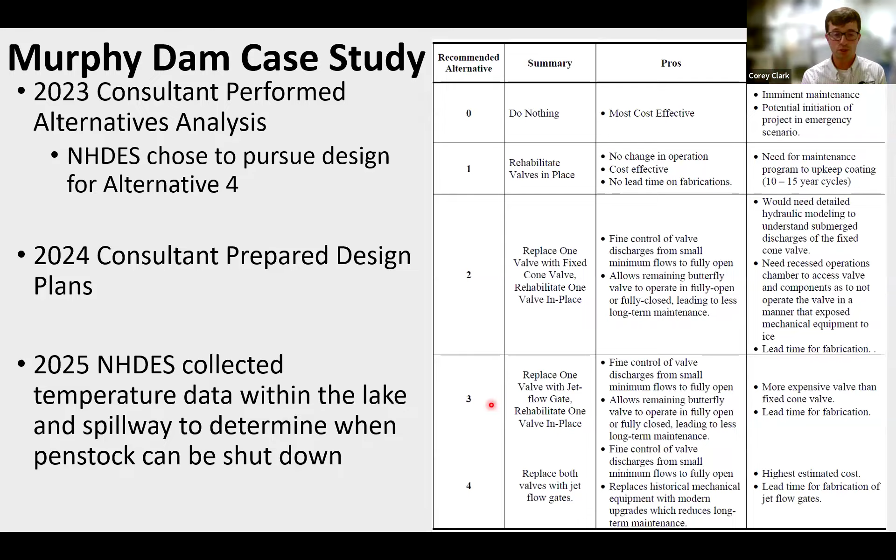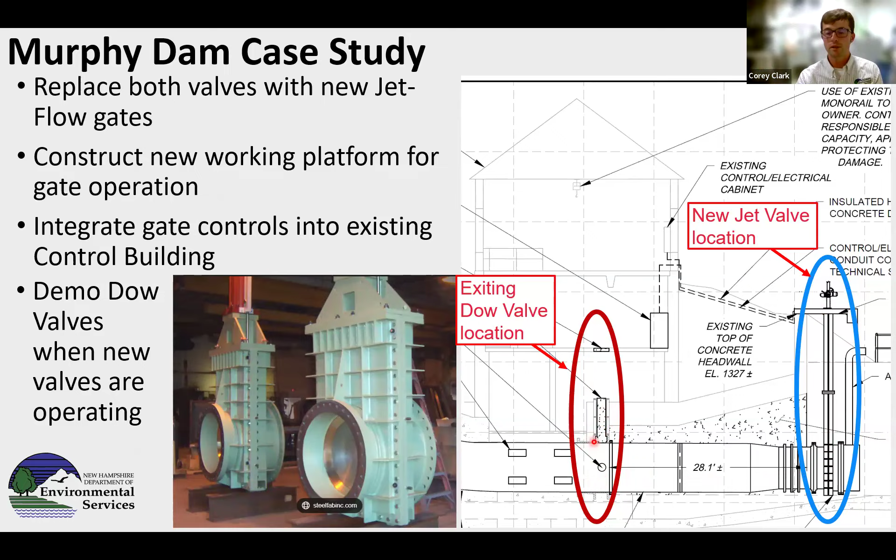So how is this all going to work? We actually put this project out to bid and we're reviewing bids right now. The shutdown periods, because of the water temperatures, mean we're going to have to shut down the penstock about October 1st. Based on that 2025 data, it looks like October 1st we can shut down and have cold enough water in the spillway through those 3 gates we installed from Goose Pond, discharging water from October 1st to January 1st. At that time, because of downstream needs, the water level actually drops below the spillway, so then we have to start releasing through the penstock once again through the winter months.

However, with the spring runoff, the water in the lake comes back up. We can discharge through the spillway, shutting down the penstock for a couple of months until June when the temperatures become too great. So over the next several years, it's going to be kind of an on again, off again process as we try to get this project done by shutting down the penstock for a period, allowing water to go through the spillway, and then opening it back up. That's one of the biggest challenges we face with this project.

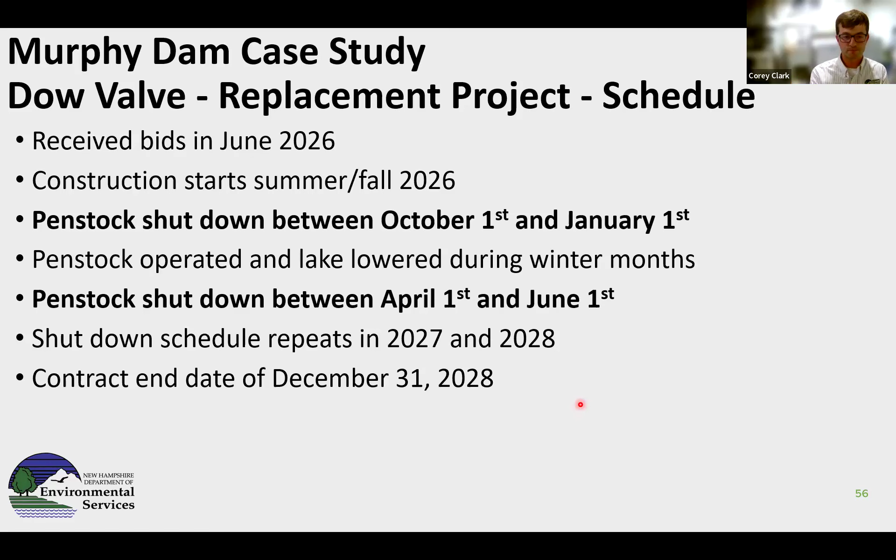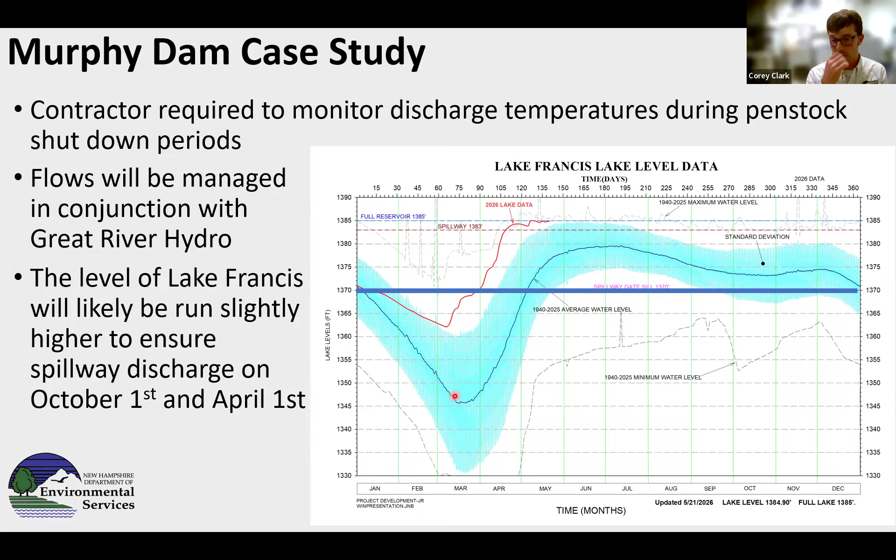So this goes back to 2018 when we dove into that PFMA analysis. It was about $50,000 to do that analysis. However, there were a lot of different steps that we had to do in between.

So that assessment to look at the Dow valves in 2022 was almost $500,000, because what we found in order to shut down the penstock appropriately, there were issues with the gate that is actually located in the tower that you saw at the beginning of my presentation. So we had to address those issues at the gate up there in order to shut down the penstock.

We also needed to upgrade the electrical services coming into where those Dow valves currently operate. That was almost another $500,000, basically running all new electrical service from the utility all the way to the building, because everything that was in the ground was direct buried from the 1930s. So all of it needed to be replaced.

We then dove into the alternatives analysis and the design, almost $400,000 in that. And just like the Goose Pond project, once we get into 2023, we were able to use a lot of ARPA funds to do those different designs.

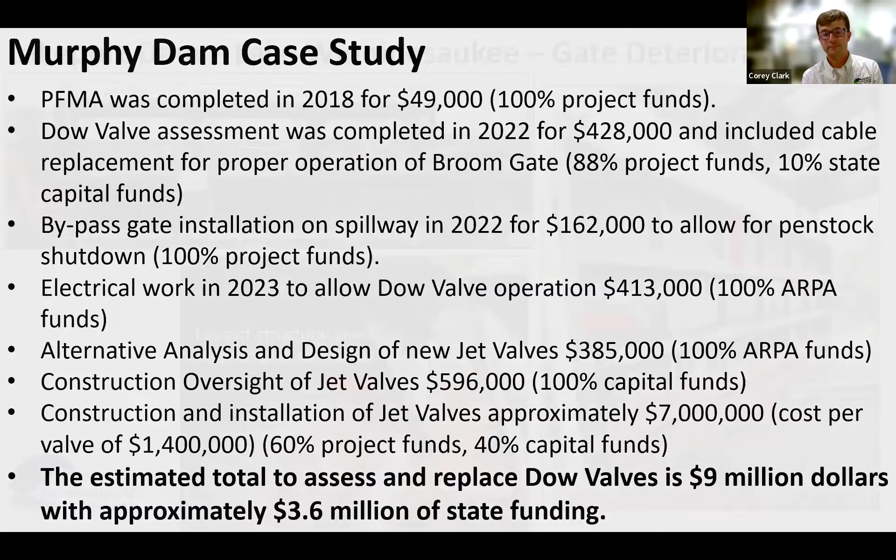So some of the issues that we see statewide, that we're going to have to address once we address these other structures. This is Lakeport Dam, outlet of Lake Winnipesaukee. We have gates, 3 big gates, 10 feet tall, about 18 feet wide, that were installed in 1958. And just like those Dow valves, we're seeing a lot of section loss and a lot of issues. So that is a project that we need to certainly address in the short term up on the outlet of Lake Winnipesaukee.

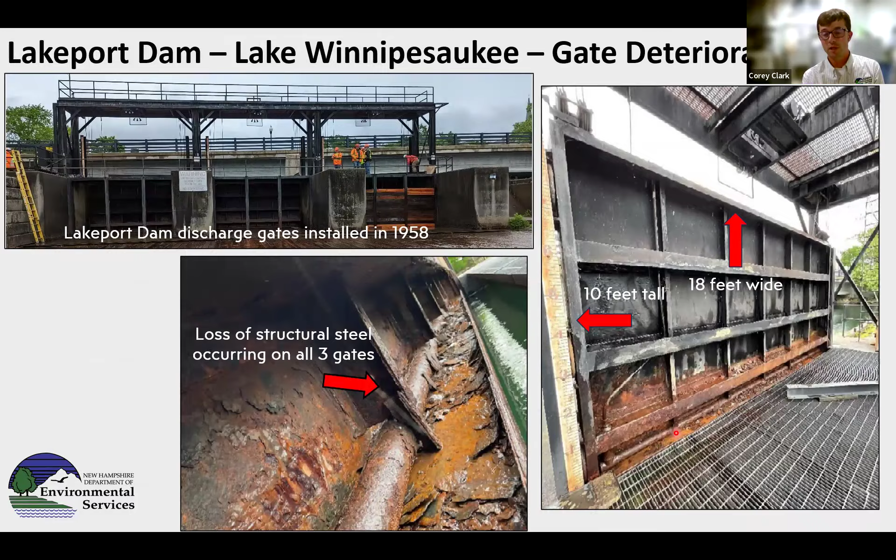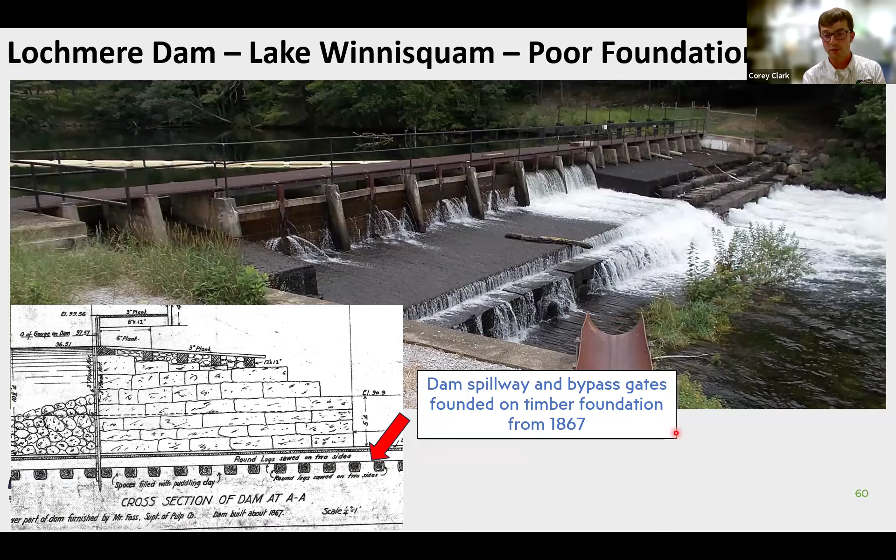Moving downstream, Lake Winnisquam, that dam is still founded on timbers from the 1800s. And so certainly when you look at the criteria for sliding and overturning and basically what this dam would do during a design event, it's likely not going to pass, certainly looking at the new modeling methods. So that dam will also have to be addressed as well.

Moving over to Squam Lake. We know that that dam, being a high hazard dam, certainly does not have the ability to discharge a 1,000-year storm event. And to be perfectly honest, a 1,000-year storm event here in New Hampshire is somewhere around 10 to 12 inches of rain in a 24-hour period. And if anybody's been paying attention to what's been happening in Albany, New York, over the past 24 hours it has received over 10 inches of rain. So it's not out of the question that New Hampshire is going to see something like this in the future.

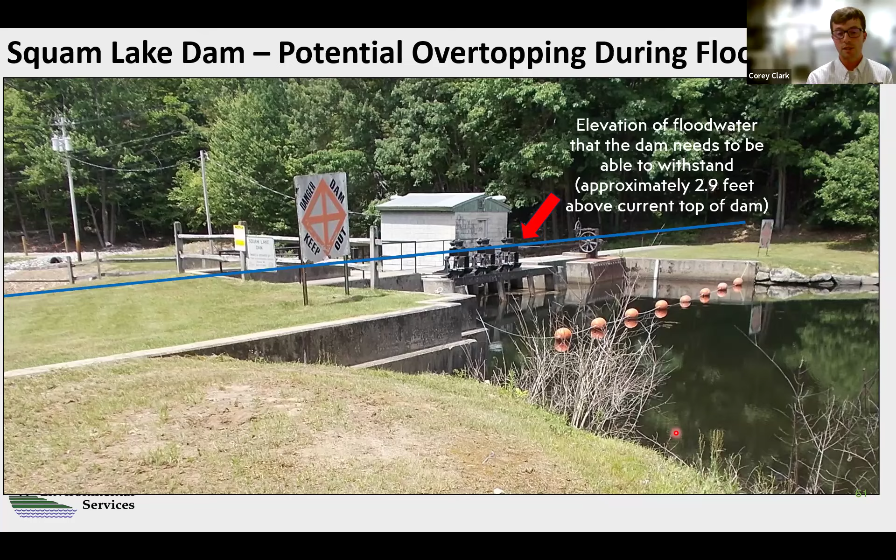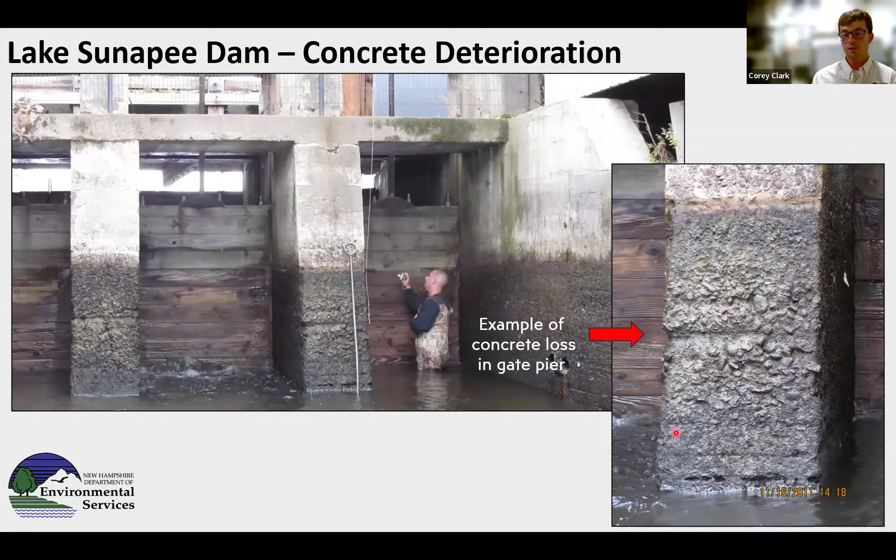And even over at Lake Sunapee, there's certainly a lot of concrete section loss. And although that dam is much smaller, those piers are certainly deteriorated and eventually going to need to be rehabilitated.

And then down at Pawtuckaway Lake, this is one of the more concerning issues that we're dealing with right now. Pawtuckaway Lake is actually impounded by 4 dams, but on the biggest dam on Pawtuckaway Lake, while the leakage you see here is very historic, we've seen that leakage moving through the dam is actually now starting to pull material from the dam itself. And so we're seeing sinkholes like this actually being created as a result of the material moving through the dam.

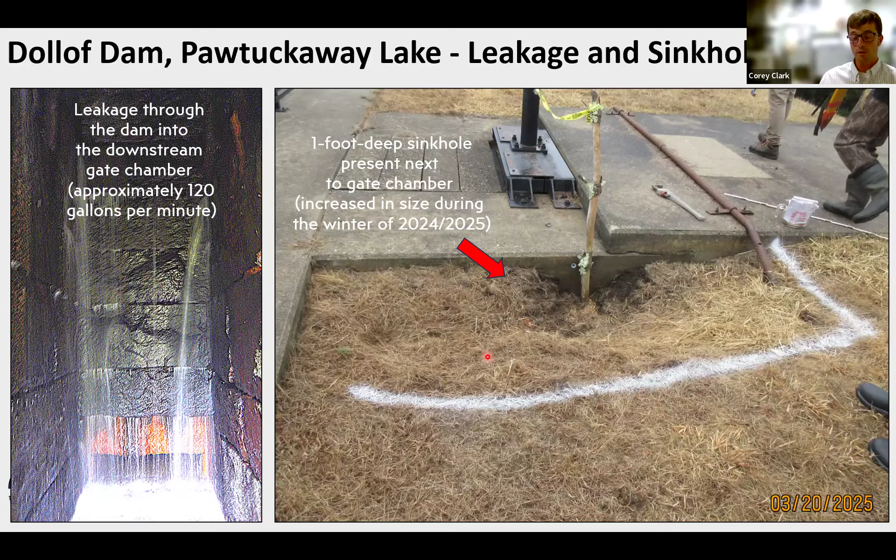And so that's a project we're actually trying to use existing funds to get the design done, and then trying to get creative and looking at some different grant funding opportunities, because the rehabilitation of all 4 Pawtuckaway Lake structures is actually going to be about $20 million, once again averaging out to about $5 million a structure.

First, you have to understand what you're working with. Identify the known historical issues through inspections and documentation. All dams in the state, certainly all hazardous dams, are inspected on a routine basis, hopefully by the owner, but also by the dam safety program. So we have those inspections going back decades and decades, so you can get a good understanding of what you're dealing with.

However, there's always unknowns associated with all of these structures. They're just like an old house - the minute you start diving into the wall of an old house, you're going to find things you didn't know were there. So determine the gaps through a potential failure modes analysis. As you saw, we did one on Goose Pond, we did one on Murphy Dam as well, and we're continuing to do those throughout the state.

To really dive into what we know and what we don't know, and then what additional studies do we have to do? Do we have to do additional test borings out there? Do we have to do additional modeling to really figure out if this dam is compliant or not?

And if it does need to be rehabilitated, look at the alternatives. Can you do nothing? Can you do something simple? Or is it complete removal of the dam and reconstruction? With that being said, ultimately looking at the financial implications and the long-term maintenance costs, is simply removing the dam the better alternative moving forward?

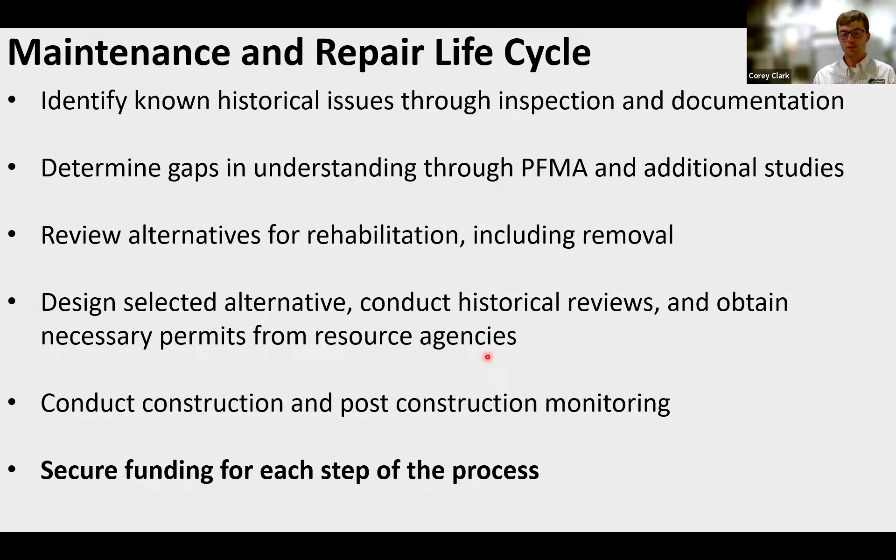So with that, that's kind of my soup to nuts presentation - a couple of case studies on dam rehabilitation projects that are ongoing here in New Hampshire, along with some of the challenges that we have, and then also an overview of the Dam Bureau.